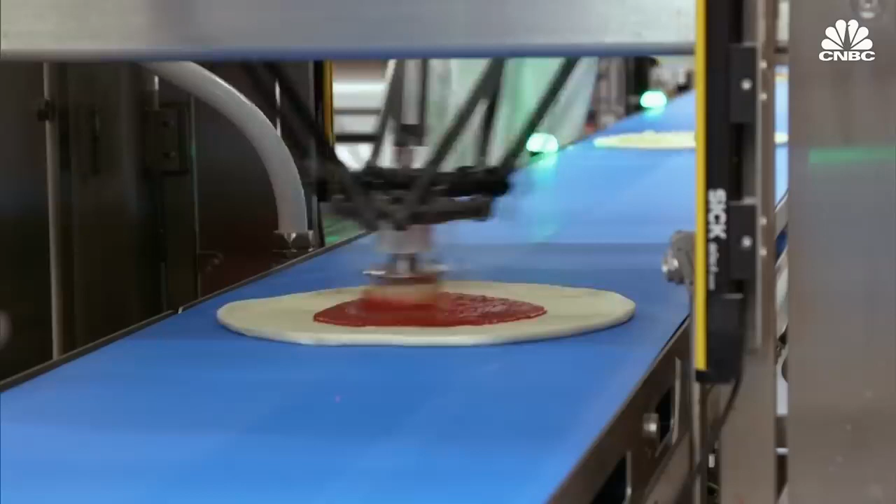What if there was a better way to make and deliver pizza to you? Turns out there is. Fast food jobs are demanding and sometimes even dangerous, but not for robots.

The machines can look at more things faster in greater detail. They never get bored. They don't need breaks.

Boston Dynamics has made a name for itself by building robots like Spot. We're using technology to advance the state of the art in molded fiber production, and we can do it with speed that is absolutely category leading.

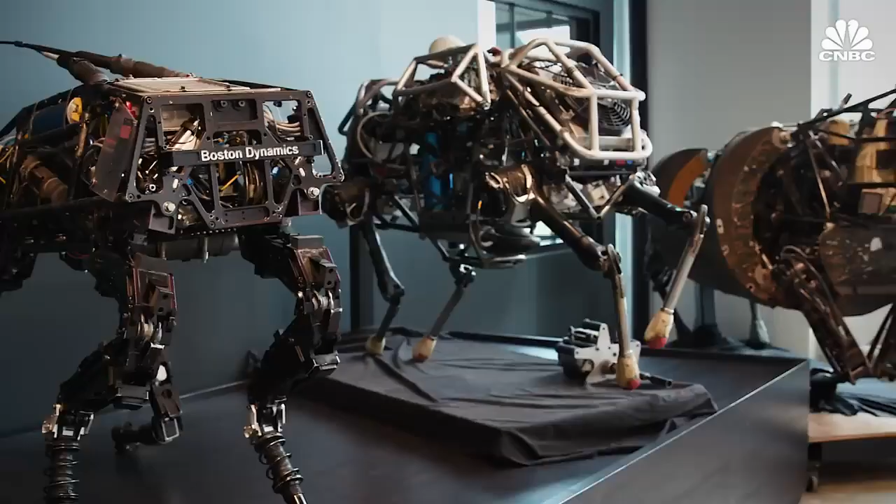Welcome to White Castle. This is Brittany. How may I help you?

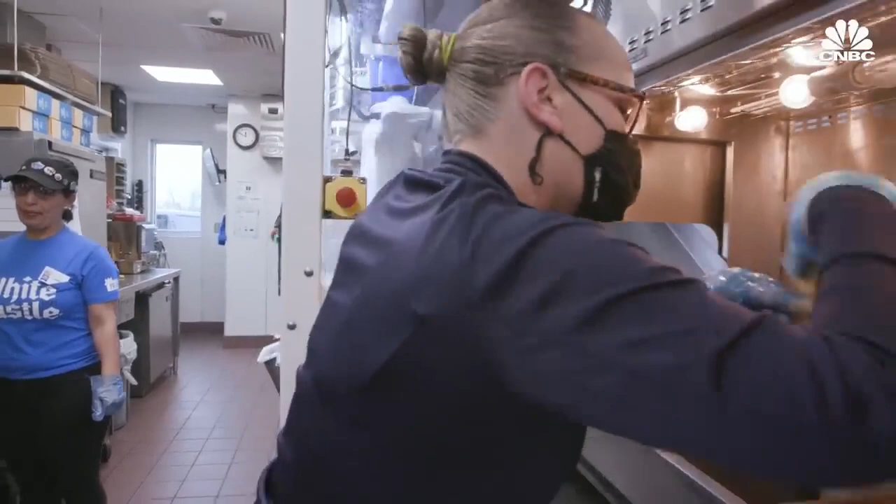This robot named Flippy runs the fry station at a White Castle outside of Chicago. With its mechanical arm and using computer vision technology, Flippy can cook everything from French fries and onion rings to cheese sticks. White Castle said it plans to add 100 Flippies to its kitchens nationwide.

We used to need 2 people to operate that French fry area during peak hours, and now we are able to only have 1 person operating that area.

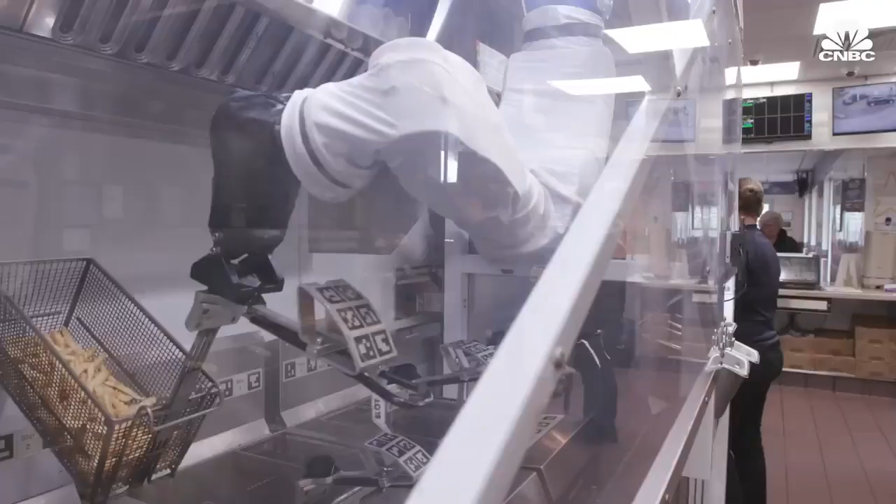Would you like to try the mac and cheese bites today? All right, thank you. If the screen's correct, it is 8.27.

Second window, please. Fast food jobs are demanding, quick moving, and sometimes even dangerous. But not for robots. When you look at the restaurant industry, it's a little bit late to the party in adopting automation and robotics in particular.

So far, the restaurants that are using them or trying them out say that this automation really only has to do with helping relieve boring tasks from workers' plates, help make their jobs easier, let them engage with the customers more. But there's a lot of reports out there kind of guesstimating how many jobs could be replaced by these robots, by automation.

Up to 82% of restaurant positions could to some extent be replaced by robots. Automation could save U.S. fast food restaurants over $12 billion in annual wages.

And restaurants are also struggling to find workers. American restaurants are down more than 560,000 jobs, or about 4.6% of its workforce from their pre-pandemic levels. About a third of Americans worked in a restaurant as their first job, and half have some restaurant work experience.

Yeah, the economics of this are very, very compelling. If you take minimum wage, just around the $20,000 per year mark, that's the cost of 1 robot.

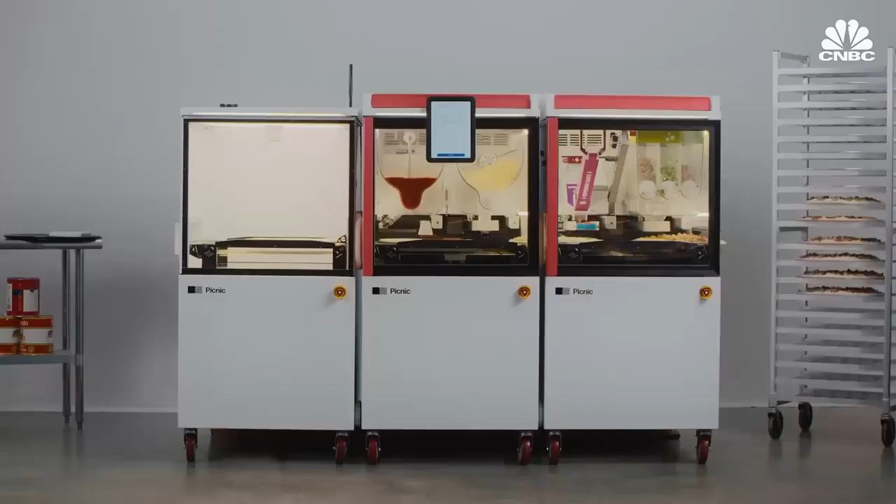Other companies in the space include Picnic, that has a robot that makes pizza, and Autec, whose machines make sushi. So what impact will robots have on the fast food industry and the livelihood of its workers? CNBC got a behind-the-scenes look at restaurant robot maker Miso Robotics to find out.

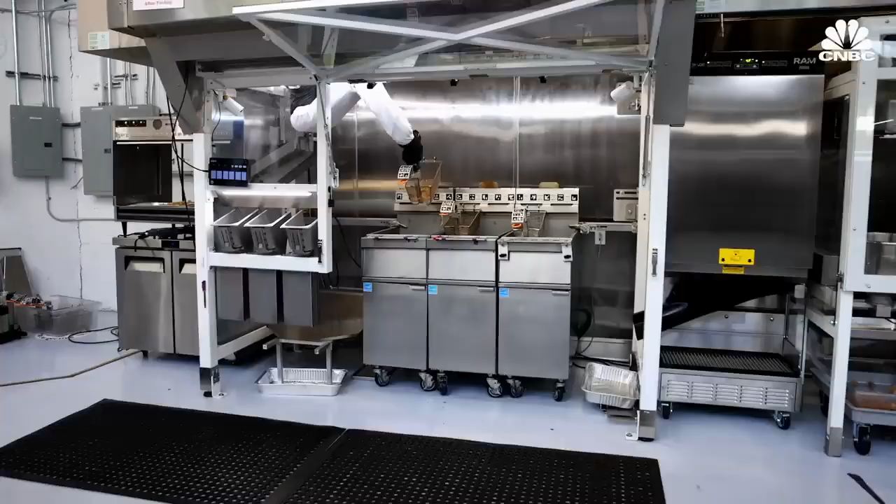Miso Robotics got its start in 2016 with a handful of engineers in a Pasadena, California garage. 2 years later, the company launched Flippy at a nearby Caliburger restaurant.

Flippy's first job was turning over a hamburger patty after it was placed on a grill by a human chef. But the company quickly pivoted to fried foods, rolling out a portable fryer station for baseball games at Dodger Stadium.

This was really the peak throughput test for us. Can Flippy keep up with in-between innings at a Dodger game and everybody goes to the concession stand? Can we meet that demand?

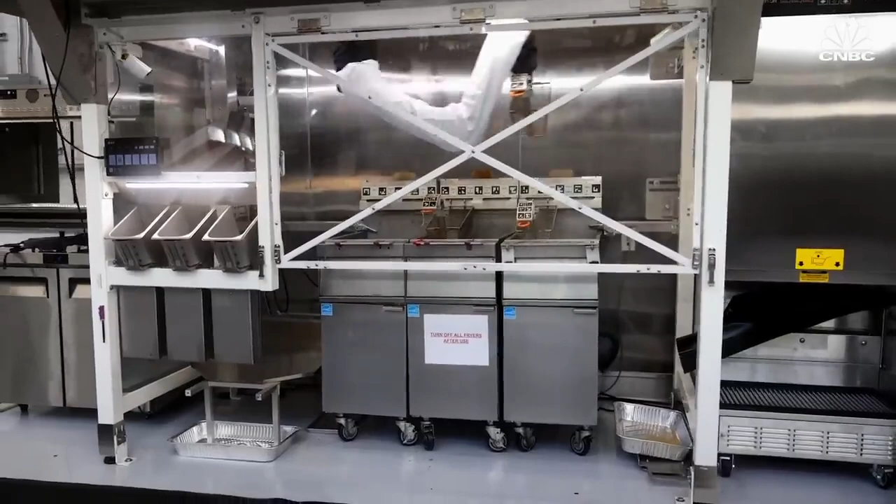In 2021, Miso launched Flippy 2 using a mounted rail system, AI, and computer vision technology that can identify and track food as it moves through the structure.

Although it has a camera, tablet, and robotic arm, engineers say the real tech is in the software. The hard thing to get right about this product is having the computer vision, the algorithms that plan the cook cycle, and the software that manages the robotic motion all work together so that it's as reliable as a refrigerator and it does the job.

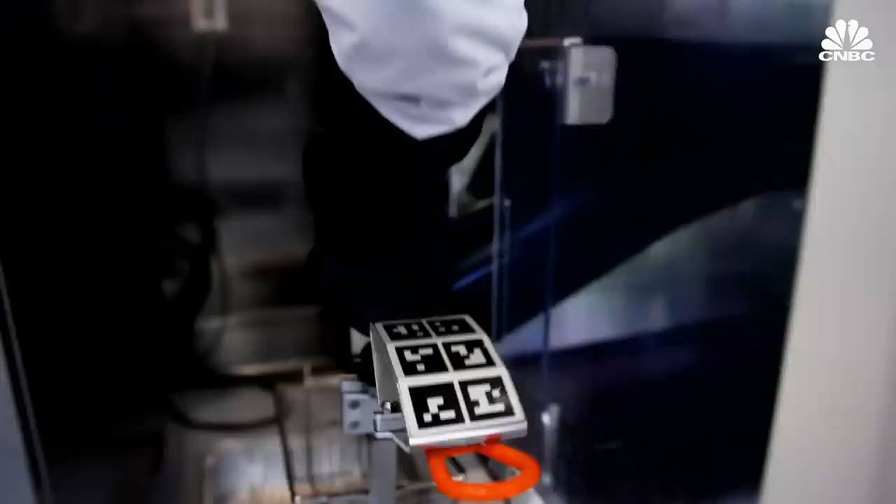Food is dispensed directly from the freezer into a basket. The robot's computer vision identifies the type of food and places it in the appropriate fryer. Once the food is cooked, the basket is taken out of the fryer, shaken, and dumped into a holding area where it is bagged by a worker.

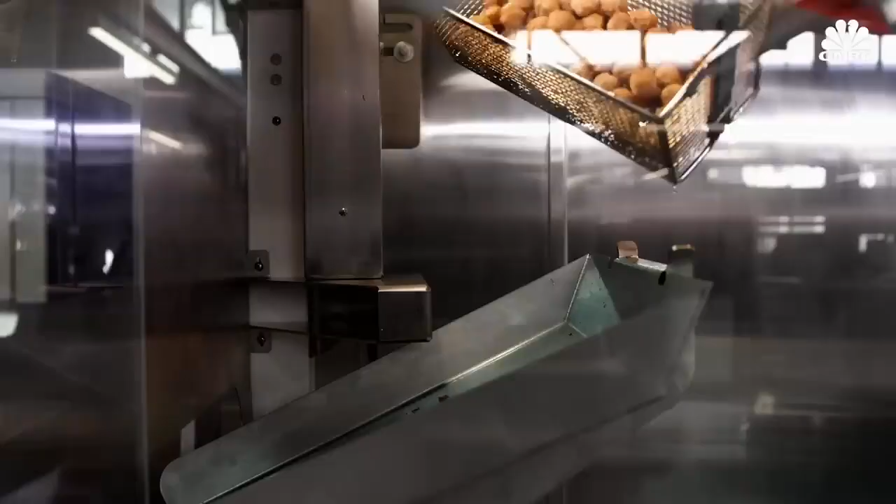For those of us who have been in a restaurant, this is exactly the same process that is done today by a human. He's constantly playing like a multi-frame game of chess in his mind, understanding where to be next, so his sequence of movements is precise and he doesn't undercook or overcook food. But what about the cost?

Miso charges restaurants about $3,500 a month for a Flippy 2 under its robot-as-a-service model. The company charges an additional fee of about $10,000 for installation.

By comparison, the median hourly wage of fast food workers in the U.S. is just $12.07 an hour. There were roughly 11.7 million restaurant workers in the U.S. in 2022. But Flippy 2 is different.

Flippy 2 works around the clock. We have many 24-hour locations where Flippy 2 is installed. Flippy doesn't call in sick.

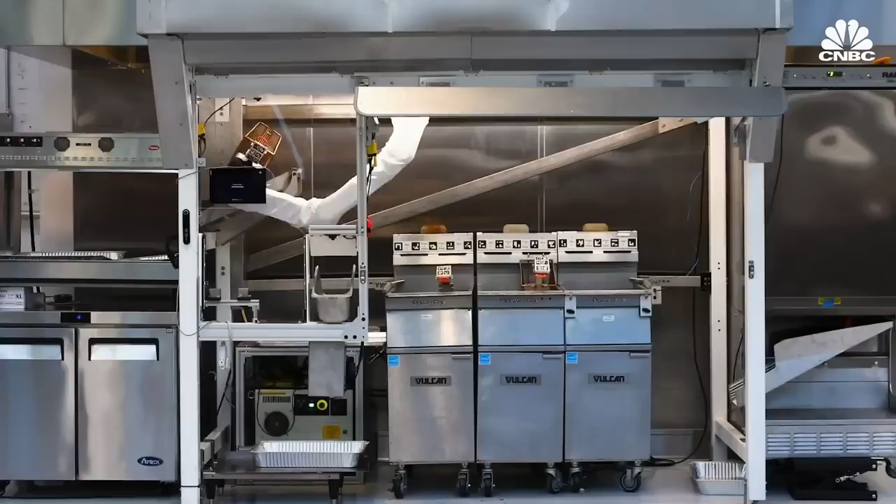Built in Columbus, Ohio, it takes Miso about 6 weeks to manufacture one Flippy 2. The current off-the-rack mechanical arm is the same type designed for car factories, and Miso says they cost $15,000 each, plus another $5,000 to modify with additional grippers and sensors.

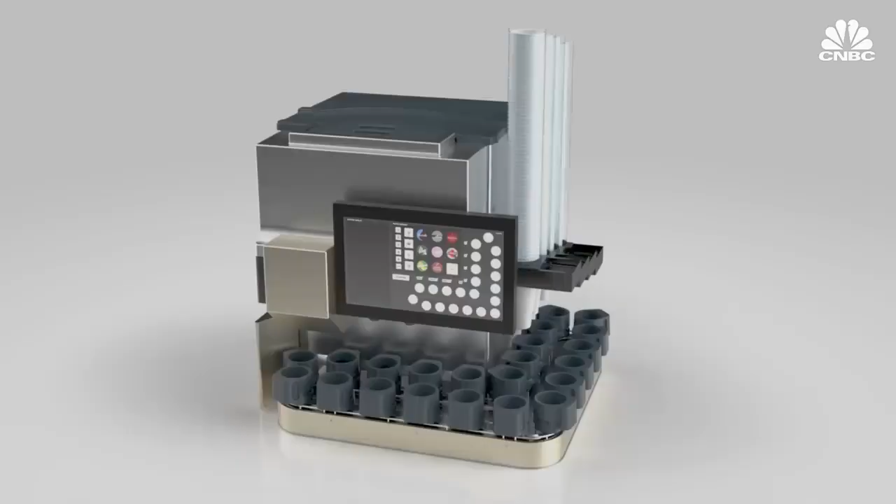Last year, Miso partnered with robotic arm maker Ally Robotics and hopes to start producing its own arm in 2023. The company also makes a streamlined version of Flippy 2 called Flippy Lite, as well as a drinks dispenser named Sippy. Flippy Lite is currently being tested in restaurants by Chipotle.

What Flippy Lite is designed to do is to take one item that requires frying and just cook the heck out of it all day long.

With about 25,000 shareholders, Miso has so far raised more than $70 million in crowdfunding. The company's also announced it is testing a robot that fries chicken wings for WingZone.

The global fast food industry is a $273 billion business, including more than 280,000 fast food restaurants in the U.S. alone. At this White Castle on the outskirts of Chicago, staff in the busy lunch hour shift face a barrage of orders coming from drive-through customers as well as the main counter.

Would you like to try any mac and cheese bites today?

Second window, please. It's very fast-paced. We're all in our positions, but we do move around, jump about to help out, to get the orders out.

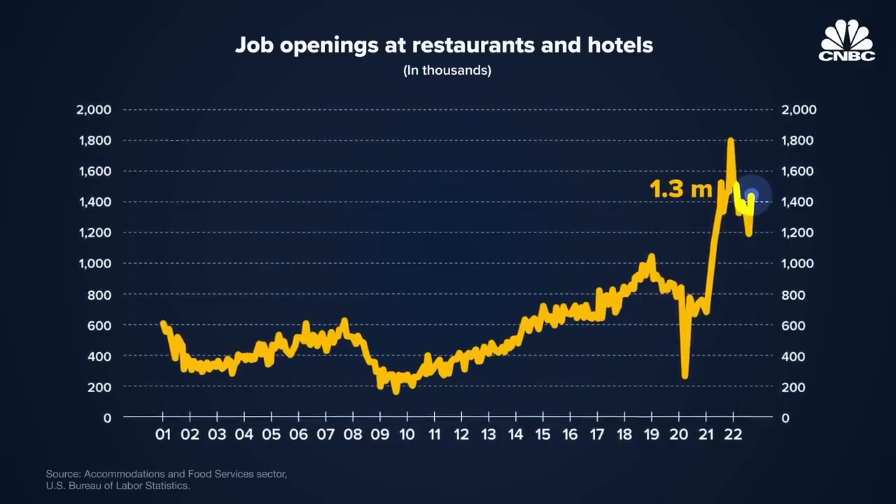But meager salaries, fewer teenagers in the workforce, and fear of COVID have been a drain on fast food restaurants. Job openings at restaurants and hotels reached 1.3 million in November 2022, the 20th consecutive month with over 1 million vacancies. Bars and restaurants make up about 90% of those positions.

A typical fast food worker makes about $26,000 a year, compared with a concierge at a hotel who can earn more than $37,000. During the pandemic, we faced a lot of staffing challenges, and things are better, but there are still challenges with staff in many locations.

To assist workers, White Castle added Flippy to take over its fry station. The robot cooks food more consistently and doesn't require time off.

Some restaurants are also looking at this as a way of saying, well, this robot is expensive, but is it cheaper than however many employees I would need to hire, especially because a lot of workers have not been sticking around as long as they're used to.

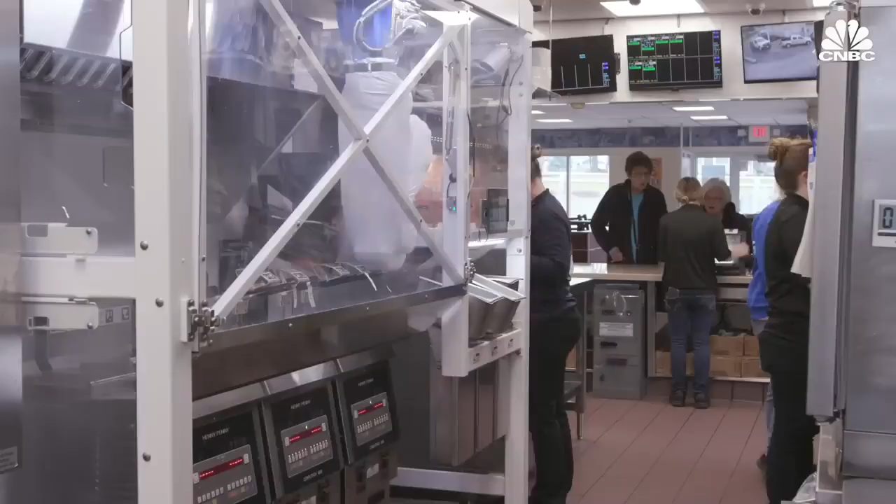This is one of the positions that is the hardest to fill and hardest to retain for restaurant operators. There are dozens of positions back of house. This one is a really demanding one. It's hot and it's very, very fast paced.

Robots like Flippy solve other problems for restaurants too. For starters, fast food work can be dangerous. In California, the state with the highest number of people employed in the fast food industry, workers face health hazards ranging from overflowing sewage, smoke inhalation, and extreme heat, according to one study.

Turnover is another headache for the industry. Prior to the pandemic, the restaurant industry faced a workforce turnover of 130%, according to Panera Bread's CFO, Michael Bufano. At the same time, low-wage workers made up 43% of the U.S. workforce.

As you look at the labor allocation within the restaurant, that's being able to shift one human from that station somewhere else, and that's saving every single month probably somewhere around $700 to $900 in actual profit.

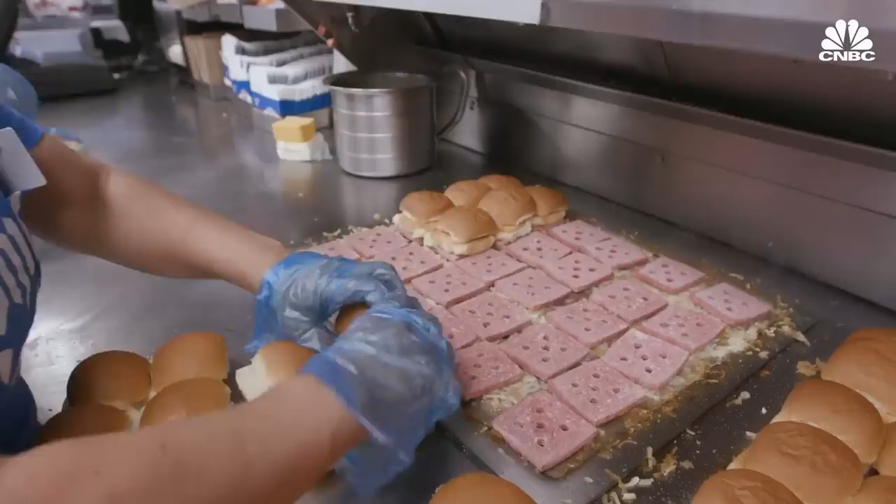Another incentive for restaurants, hard-to-fill positions have forced chains to push hourly wages to new highs. The wages have been very low in these industries. They've really been very much pegged to the minimum wage, so that when the minimum wage has been allowed to decline in real terms, that is, it hasn't kept up with inflation, then those jobs get progressively less and less attractive.

Labor is one of the biggest costs restaurants face, averaging about 25 to 30% of sales. McDonald's said it would reach an average of $15 an hour by 2024 at all company-owned restaurants. Starbucks said it was bringing its pay floor for U.S. baristas to $15 an hour.

Gen Z consumers made 5 billion restaurant visits in the year ending July 2022, including 4.3 billion trips to fast food eateries.

Restaurants often have thin margins, which is one of the reasons why adoption of automation has been slow. But that could be changing as the cost of robots has declined by 50% over the last three decades.

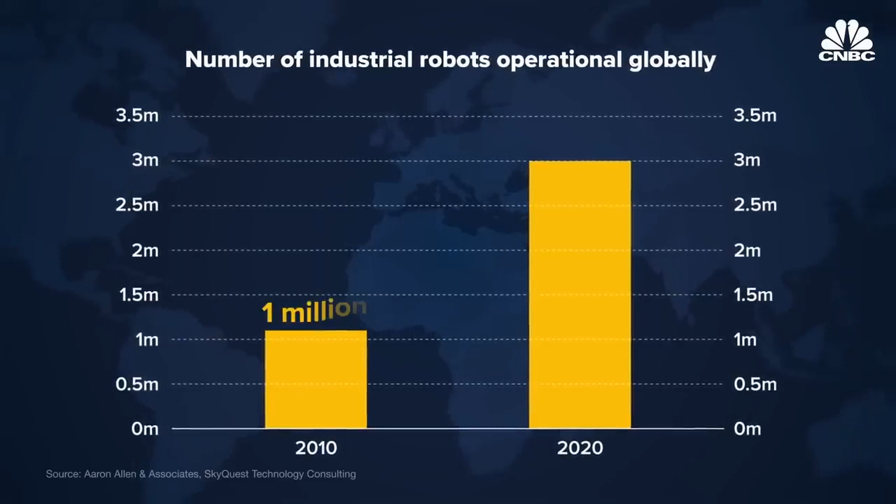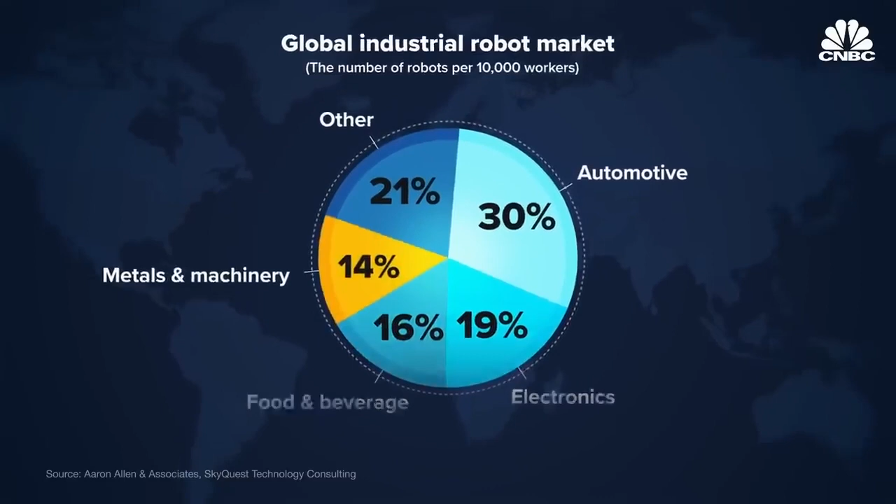Industrial robot usage has tripled over the past decade, from about 1 million in 2010 to 3 million in 2020. The auto industry, by far the largest segment in the market, is followed by electronics, food and beverage, metals, and machinery. The industrial robotics market is expected to reach $81 billion by 2028, up from almost $42 billion in 2021.

But will those trends impact Miso's business? Robots are hard and expensive to develop. It takes a lot of time and money, and frankly a lot of engineers, to get all the technology working together smoothly. Miso makes money by having more and more robots in the field.

In 2021, Miso spent $1.5 million on R&D, $7.8 million on salaries, $6 million on sales and marketing, and a little over $6 million on overhead and administrative expenses. Revenue was just $36,000 in 2021, mostly from the deployment of one Flippy.

Right now, it seems like Miso Robotics is probably the biggest and best known player in the space. Competitors are a pretty small pool at the moment. We've been on the forefront of this for a long time, but they are coming, and we know the ones that aren't here today will be here tomorrow.

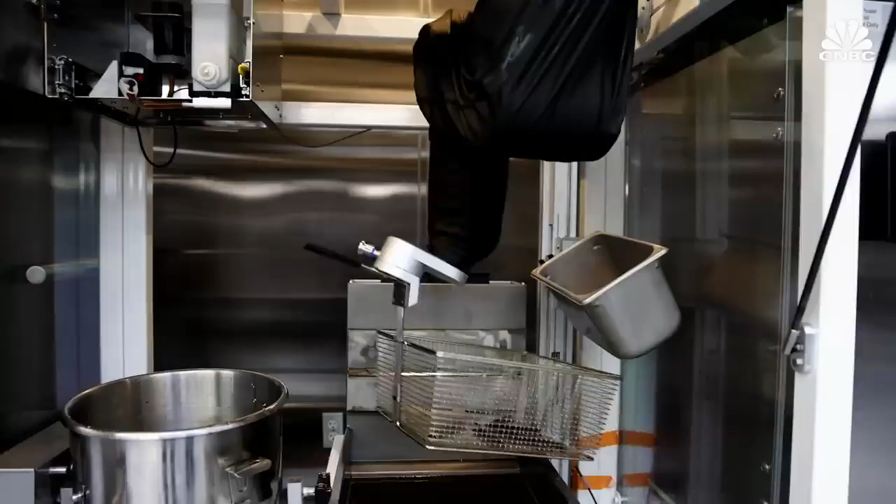Robot adoption could come quickly, in a similar fashion to the way delivery apps revolutionized the restaurant space. The global food delivery app business is over $150 billion, triple the amount it was in 2017.

And that would be welcome news for fast food restaurants who face pressures ranging from rising food costs to staff turnover. Americans spent $2.1 trillion on food in 2021, with more than half of that money going to food away from home purchases. The tide has turned.

There's no longer a question of whether robotics are coming to the industry. It's a foregone conclusion. The question is at what pace and in what form. And what you will see in the months and years ahead, for the foreseeable future, is more and more automation solutions like Flippy 2 being deployed in everyday restaurants, including some of the best known brands in the world.

There was a lot of hype in 2017 around Zume. What if there was a better way to make and deliver pizza to you? Turns out there is. Zume is revolutionizing the delivery model. All pizzerias out there, you're in trouble.

At the time, Zume was a pizza company that used robots to automate the pizza creation process and utilized large oven-carrying trucks to bake the pies as they traveled to customers. The idea was a hit and earned Zume a $375 million investment from SoftBank.

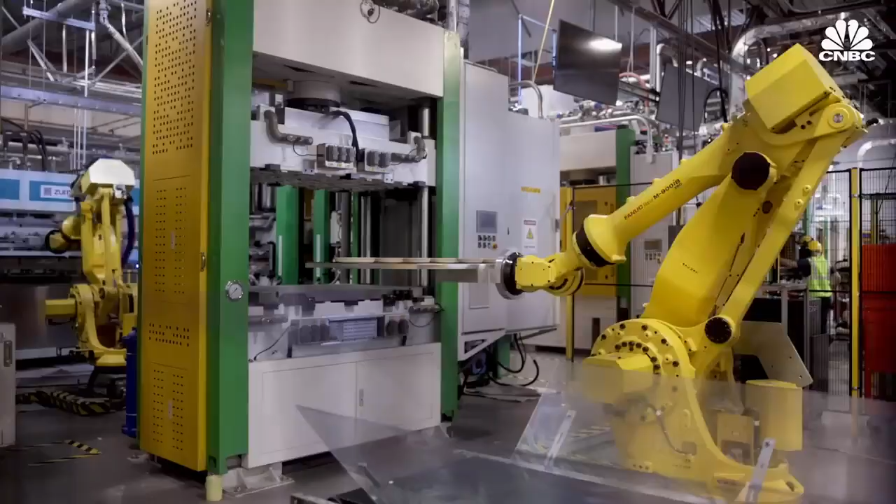Now, Zume is dedicated to producing compostable packaging that is durable and backyard compostable, breaking down in a matter of 90 days. Zume is breaking into the $274.2 billion sustainable packaging market, which is expected to grow to $413.8 billion by 2027. But the industry does face challenges.

I wish I could say it was just the cost, and cost is going to come down, or that we just need one thing, but it's really, I think, a variety of factors. As the oceans fill up with plastic waste and as companies make pledges to switch to greener packaging, it could be great timing for Zume.

So let's take a look at some roadblocks in the compostable packaging industry and what can be done to overcome them.

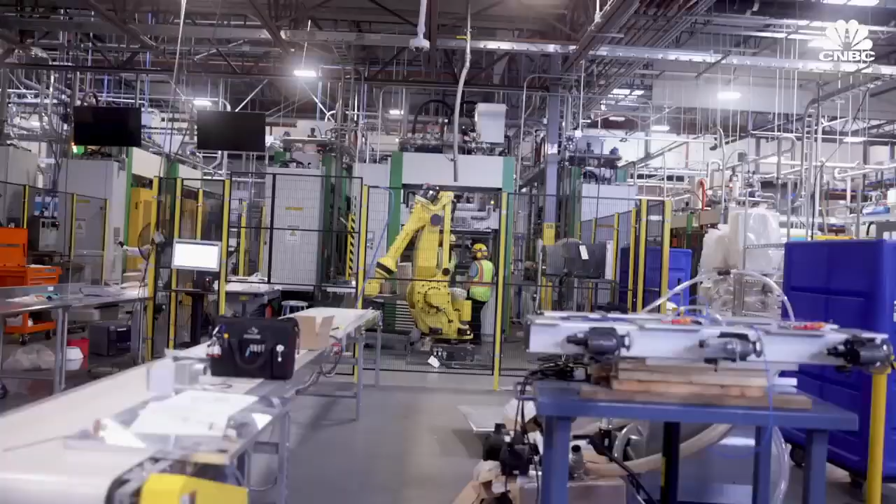Let's talk about the life cycle of a package first, using a takeout container as an example. Takeout containers can be made of many different materials, which all have their pros and cons, like plastic, metal, styrofoam, cardboard, and a compostable material like molded fiber.

Some plastics and metals can be recycled, but they have to be perfectly clean in order to be made into another product. They can also be downcycled, which is where they're used to create something that cannot be recycled again, like a park bench. But recycling has failed in the US.

In 2018, less than 9% of plastic waste was properly recycled in the US, and it got worse in 2019 when China stopped importing American trash. So most of what you think may be getting recycled is actually getting sent to landfills, or making its way into rivers and oceans. The UN says that by 2050, we'll have more plastic than fish in the ocean.

Plastics become so prevalent that every person on the planet eats a credit card's worth of plastic a week. Plastic recycling has actually been considered by some to be a ploy by oil companies to make plastic production seem more environmentally friendly than it is.

And even sending food scraps to the dump can be harmful. When you're actually introducing those organics in landfill, you create a lot of methane. And as you know, methane is a very important greenhouse gas emission. So then you want to reduce that amount of organics that you send to the landfill.

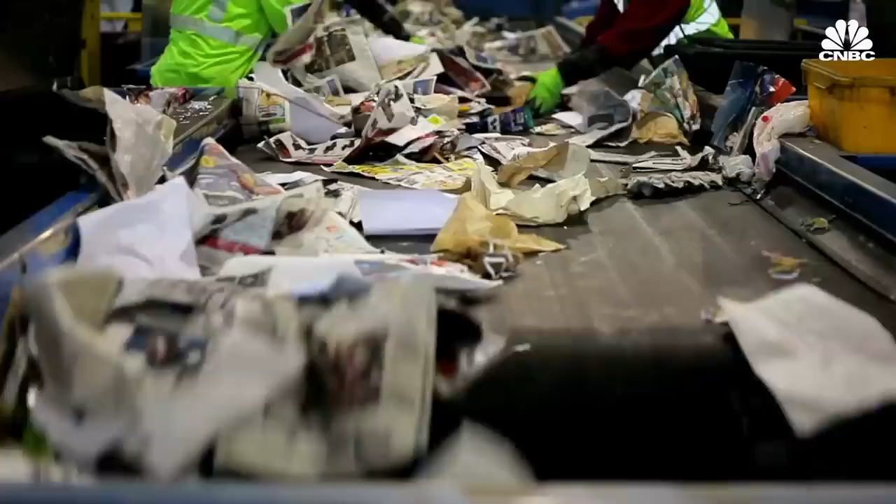Aluminum containers are a bit easier to recycle, but still only saw about a 35% recycle rate in 2018. Cardboard is recyclable and compostable, but only if it's clean and doesn't have some sort of coating on it. Virgin cardboard can also contribute to the deforestation of endangered habitats.

Styrofoam, or polystyrene, is technically recyclable, but not in a way that is economically feasible or environmentally effective. Many cities and states, including New York City, Maine, Vermont, Maryland, and a long list of cities in California, have completely banned the use of polystyrene, and the trend is growing.

Compostable materials seem like a solution to these recycling issues, but come with their own set of confusing marketing tactics and end-of-life difficulties. For instance, the word biodegradable, which is used to describe certain materials like plastic made from corn, has been scrutinized. A bio acronym at the beginning doesn't necessarily mean that the polymer is from bio-based resources or is biodegradable.

And if it's biodegradable, it doesn't mean that it's compostable either. The word biodegradable on its own, as a marketing term, is seen as potentially pretty misleading. So several states have passed laws forbidding the term biodegradable in marketing language when it comes to single-use items, including California, Maryland, Washington, and Minnesota for bags specifically.

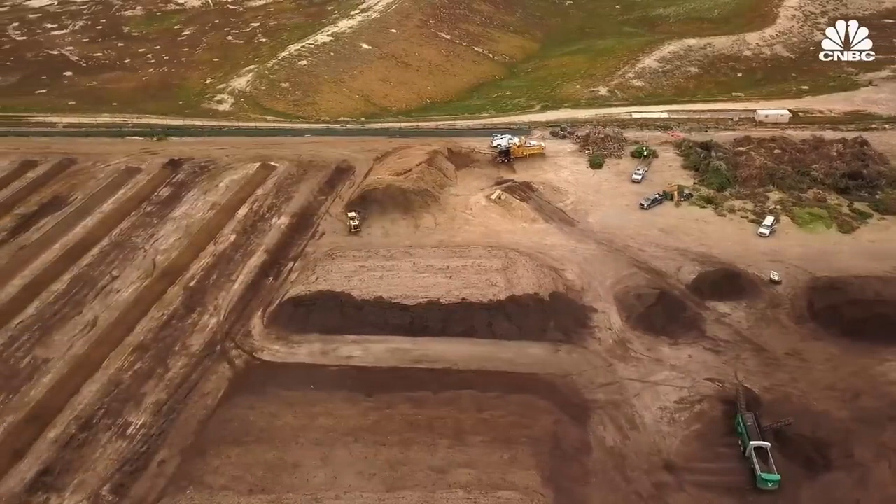Some materials require composting in an industrial facility, like certain cutlery and coffee cup lids, which means you can't just throw it in your backyard and hope it will break down. It has to be sent to a facility that monitors the chemical and temperature levels of a large compost pile. The materials are also sifted to make sure everything has broken down properly.

And if you think you're doing the environment a favor buying these industrial facility compostable products and still throwing them away in the trash, you're only partly correct. Landfills are usually too compressed to allow oxygen and microorganisms to break materials down, even for things like food or paper, which are usually pretty easy to break down.

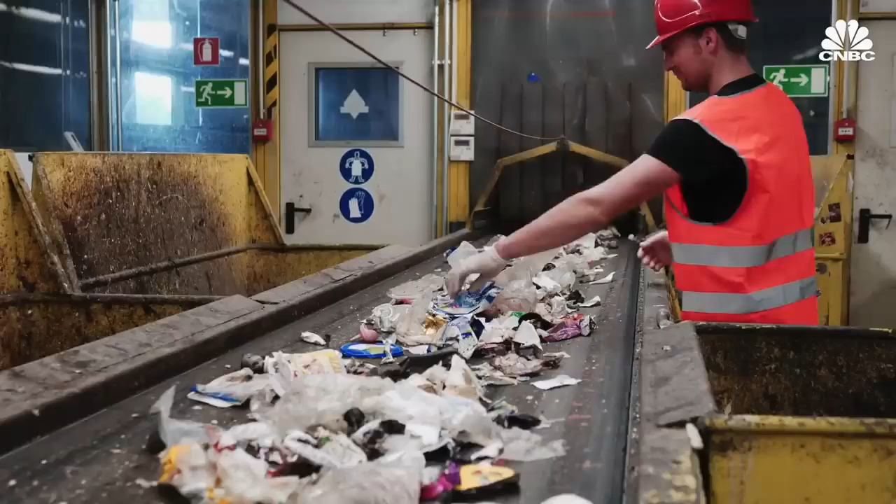Unlike with recycling, where you have different plastic types and different shapes that can help determine recyclability, and each community has its different requirements based on what their recycling facility can sort, there's no one common definition of what is recyclable. With compostability, it's different. We have international standards saying this is what is compostable, regardless of what plastic type you're using, regardless of whether there's paper in there or not.

According to one report, only about 27% of the United States population has access to some kind of composting program that accepts either food waste only or food waste and some form of compostable packaging. So it's not a ubiquitous solution yet.

The real difficulty here at Zume is finding the solutions to replace all of those arrows, so you don't have the confusion at the consumer level, can I or can't I, and throw your hands up and just throw it in the trash and let it go to the landfill. So it's going to make it simpler and easier. I know I can just take it, compost it, and 90 days later use it to fertilize my garden. Zume developed packaging that is backyard compostable, and it really makes a difference.

Backyard compostable packaging can break down without the use of industrial monitoring. They use microorganisms in the soil or water to break down packaging. For people living in areas without composting services, this gives consumers the option to discard their waste in a local compost pile or even in their backyard compost piles.

I can tell you that we've tested our products with independent labs in all of the known waste streams, and we have all the certifications that give you the results that you'd be looking for.

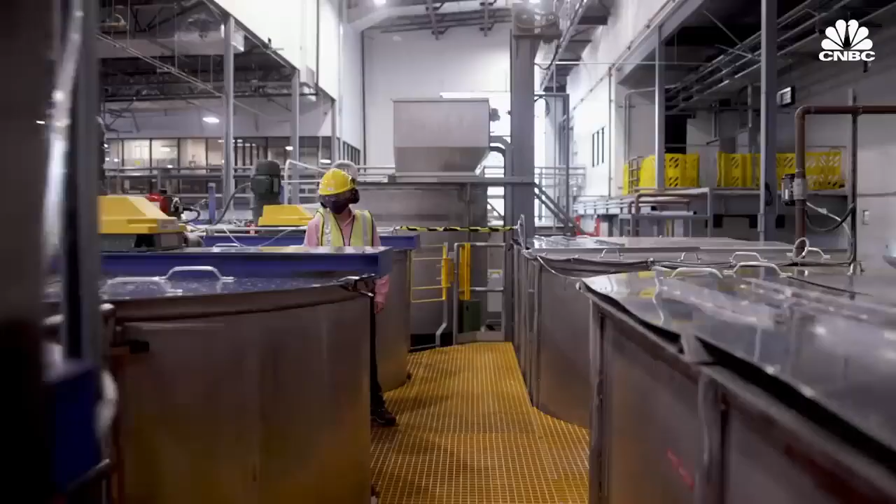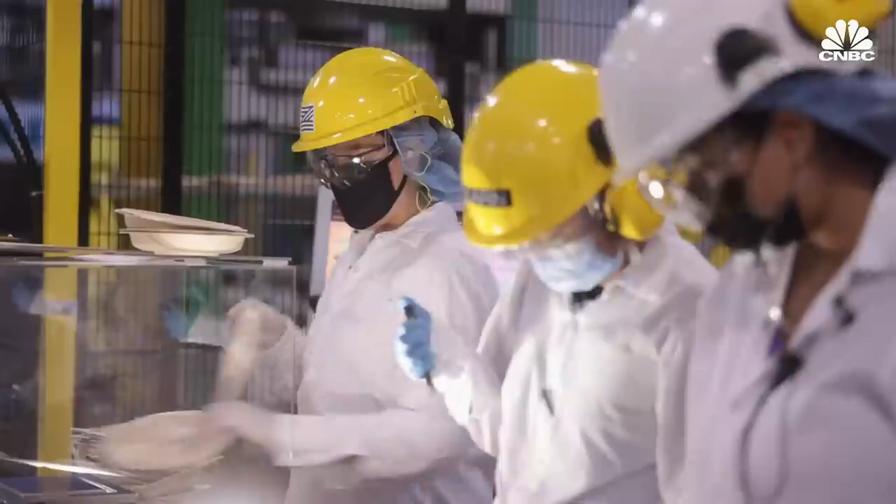One of the big things I think we can do here is revamping the supply chain. Let's build a pulp mill next to the source of the agricultural waste, so it doesn't get burned or taken to a landfill. Turn it into premium molded fiber packaging that then is composted, so it's a place to grow the next crop. It's a closed loop supply chain, and that's something I think we've heard a lot about over the past year, the supply chain.

The company has products available in 21 countries, including takeout containers, cosmetics packaging, and their robotic technology, for when a company wants to produce packaging themselves.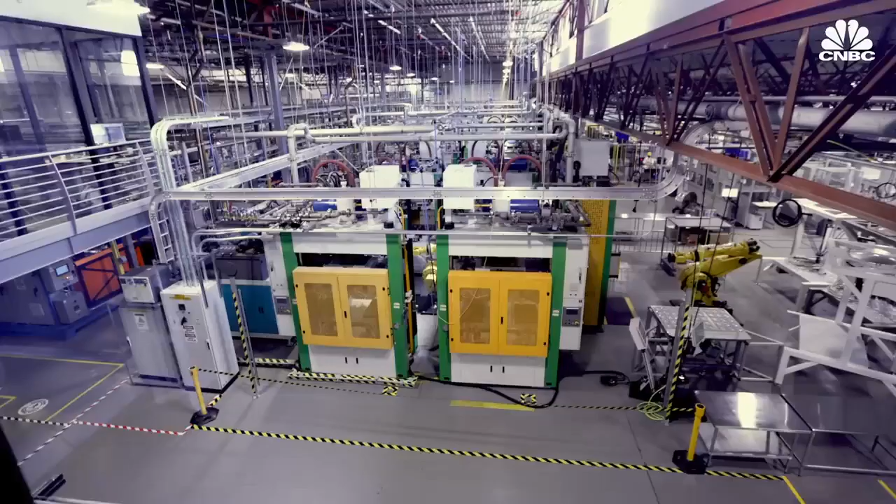We work with some of the largest industrial companies in the world, and they build factories based on our technology. At the same time, we work with some of the biggest brands in the world, and we solve their product problems. We help give them a path beyond plastic. When we have these fully qualified products and these fully qualified factories, we connect the two of them together, and we give brands a path beyond plastic at scale with great economics for the brands and great economics for the factory partners.

The sustainable packaging industry is a $274.2 billion a year business. Of course, the packaging industry as a whole is about $900 billion, so there's still a lot of work to be done.

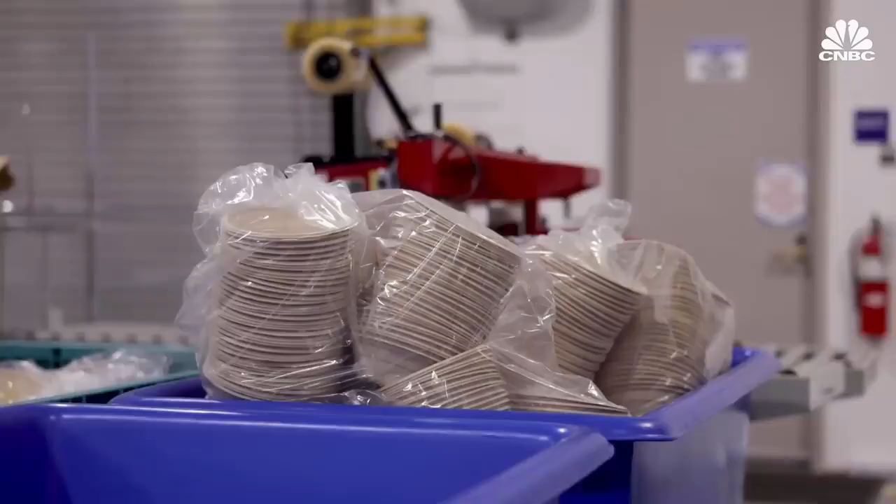There are some constraints when it comes to compostable packaging, like higher cost. 100 plastic straws can cost as low as $1.53 when bought in bulk, compared to paper straws, which can cost $1.67 for 100 when bought in bulk. That's an increase of 9%. These plastic clamshell containers for burgers and sandwiches can cost 13 cents each when purchased in bulk. Their natural fiber counterpart can cost 19 cents each when bought in bulk, an increase of 46%.

Remember, packaging is a commodity and it's always a low-cost product. So in general, for food or for this kind of situation, your margin is very small, you don't have a large amount of room there to have a cost in the packaging system.

Zume says its robots are the reason it can keep costs down. Previously, machines could either make very low-quality things quickly.

Some machines could make high-quality things very slowly, but they were so expensive that they would be outrageous for a consumer market. What our technology does that's so revolutionary is it can make very high-quality parts very fast. And then there's the question of performance.

Compostable packaging companies have come up with many ways to make their products as durable as environmentally damaging alternatives, but it's not always easy. We're using technology to advance the state of the art in molded fiber production, so we can take many millions of tons of agricultural waste and turn it into not plastic. And we can do that without compromising on performance or on price, and we can do it with speed that is absolutely category leading.

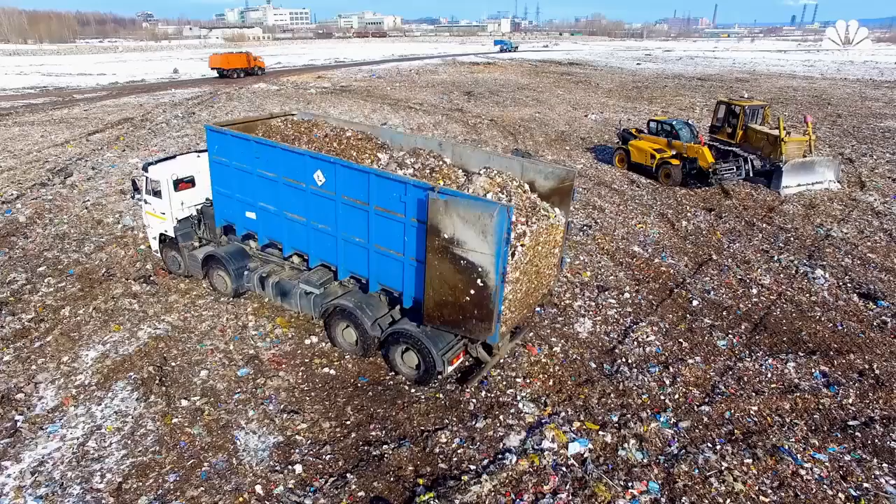One thing Zume doesn't have control over, though, is the difficulty that comes with waste management, including the lack of composting programs mentioned before, along with the general confusion of whether something is compostable or not.

The problem is that the waste management system is still at the state level, so we have 50 states with different types of goals. We should have tried to get at least an aggregation of states, or if the federal government can actually pass some type of legislation where we have goals to move the whole country forward.

Without a fully circular economy, meaning packaging is created, used, and turned back into materials that can be used to create more, our packaging obsession will continue to cause problems. There's tremendous demand for these solutions in the market and with consumers, so now that the solutions exist and the demand is there, now we're getting the scale.

You may have been one of the 140 million people who've seen this video on YouTube. Boston Dynamics has made a name for itself by building robots like Spot, which move in ways that many of us have only seen in sci-fi movies.

We look at ourselves as having mastered the ability to create robots with mobility, vision, and manipulation, and we think we can combine those in almost an infinite number of ways at different applications.

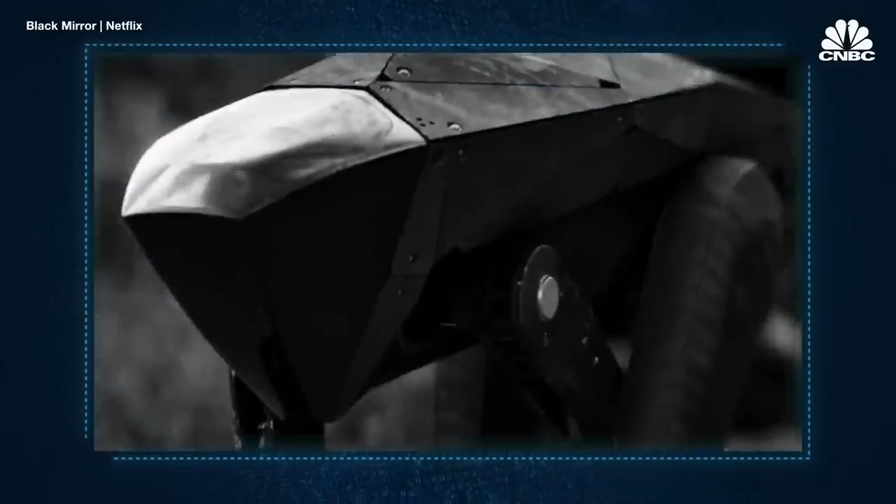The public's fascination with Boston Dynamics' robots is likely owed to equal parts awe and fear. A 2017 episode of the popular dystopian Netflix show Black Mirror depicted a woman running from a pack of killer robot dogs. The show's creator later admitted in an interview with Entertainment Weekly that Boston Dynamics' videos were the inspiration.

Most people think when they see Spot that that's cool. There is a small fraction of people who say it's creepy. We've been telling ourselves fictional stories about dystopian robots for 100 years. I think it's people's desire to explore that fear that makes them want to react so negatively to Spot.

But while Boston Dynamics has sparked the imaginations of the general public with its viral videos, the company is now hoping to get the attention of paying customers.

I expect that we will become a serial producer of novel robots with advanced capabilities. I think we'll build every 3 to 5 years. We're going to roll out a new robot targeting a new industry.

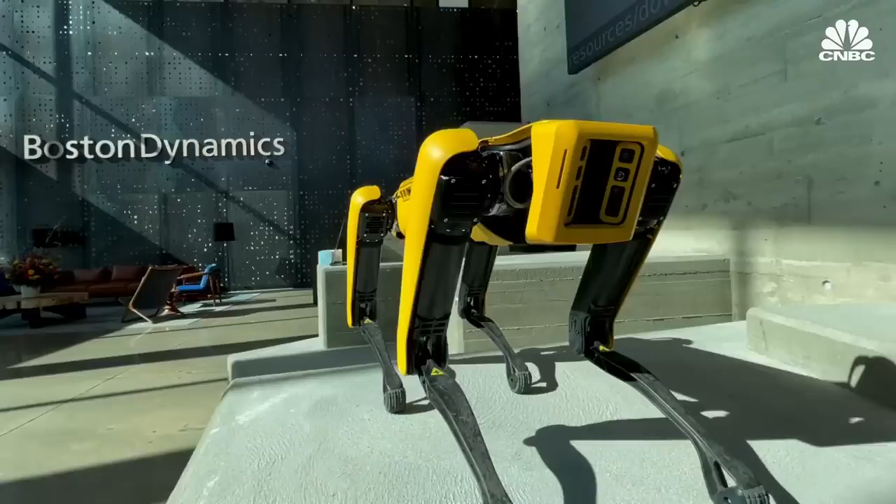CNBC got a rare look at Boston Dynamics' office in Massachusetts, where the team showed off two of the robots they're working to commercialize, Spot and Stretch. The yellow robot that you see walking around is a mobility platform. It gets really interesting when you start adding payloads on it and integrating it into things.

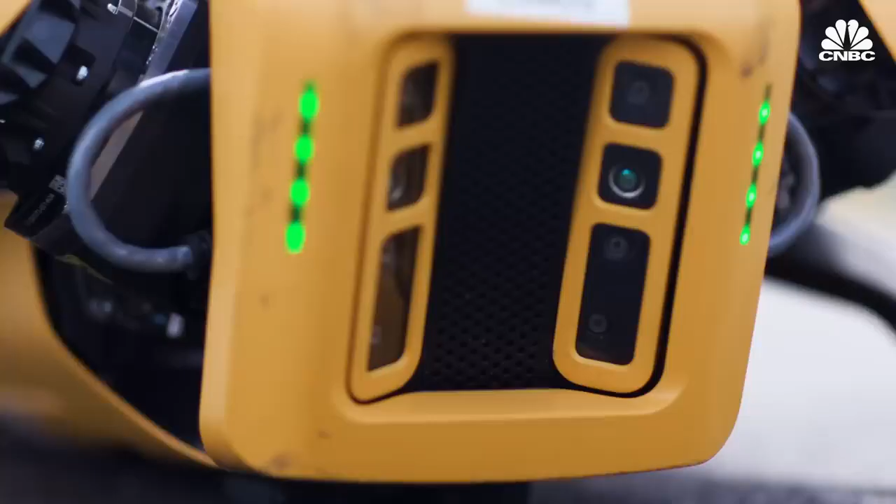We have really nice visual cameras, thermal cameras, microphones, and gas sensors, and those let you take the robot into interesting places and collect data about what's going on.

We see Stretch as ultimately a general purpose box-moving machine that can be used anywhere in the warehouse. Those two markets in particular, the robotics inspection and the warehouse market, are what we perceive to be the fastest growing markets within all the robotic subsegments.

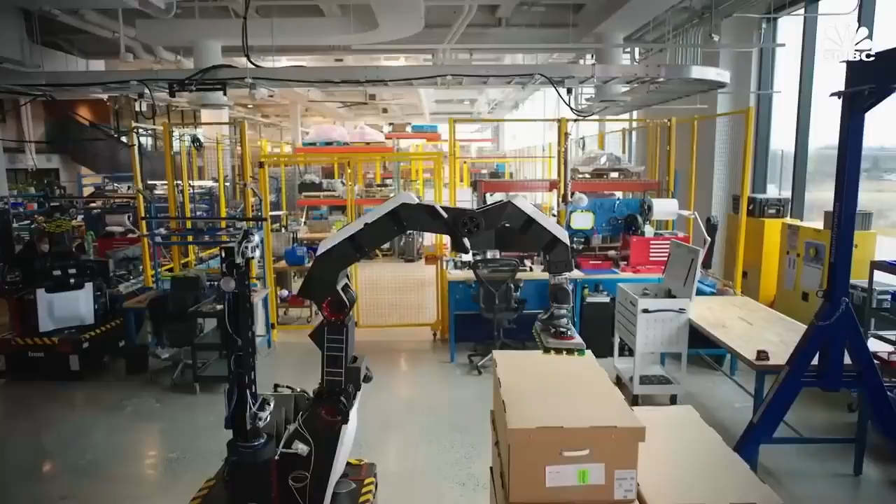The machines can look at more things faster in greater detail. They never get bored, they don't need breaks, they're just relentless. With nearly 30 years of experience, Boston Dynamics has proven its ability to make robots that move in remarkable ways. Now the question is, can the company turn a profit?

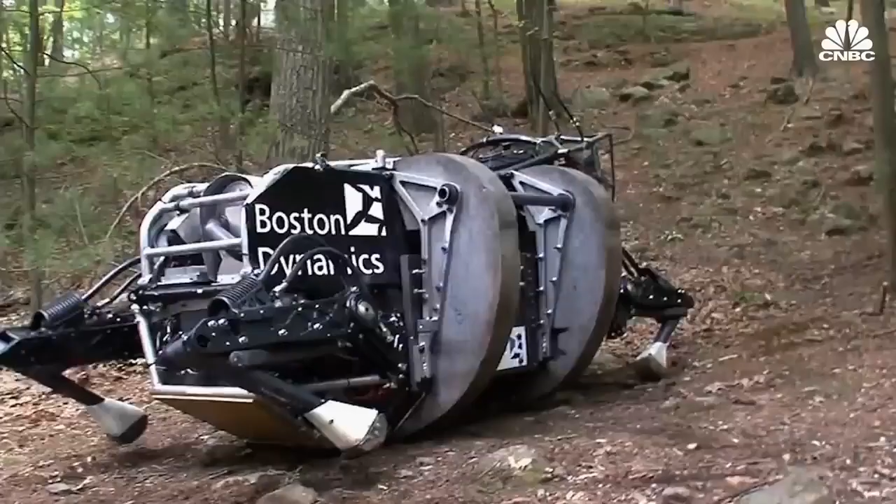Boston Dynamics was founded in 1992 by Mark Raibert. The company was an offshoot of Raibert's work on dynamic robots at Carnegie Mellon and MIT. Early on, much of Boston Dynamics' research and development was funded by the US military and DARPA. In addition to robots, Boston Dynamics also developed 3D computer simulation software.

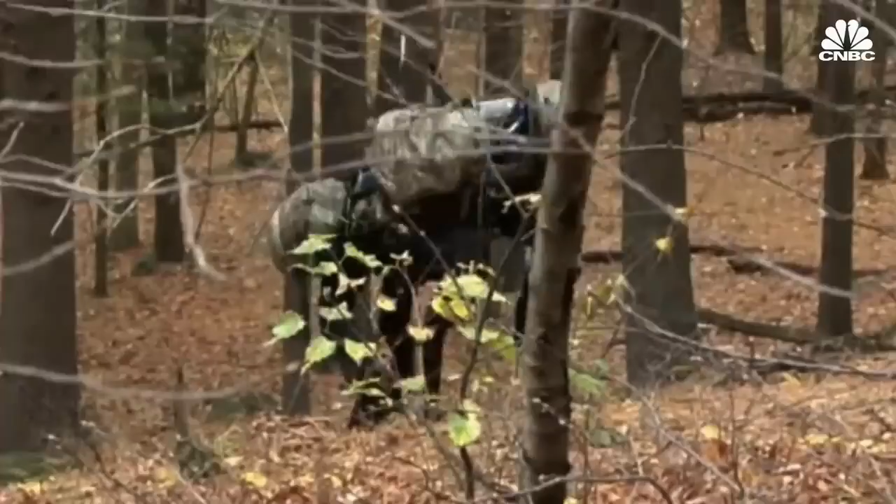This robot, LS3, was part of a project that we worked with DARPA and the Marines. This was a proof of concept project to show that the robot could actually carry equipment in a useful way for a Marine squad. Some of Boston Dynamics' other early creations included Big Dog, which, like LS3, was meant to traverse rough terrain and help soldiers carry gear, and Cheetah, which at its fastest could reach speeds of 28.3 miles per hour.

Petman was one of the company's first humanoid robots. It was developed for the US Army to test the special clothing used by soldiers for protection against chemical warfare agents.

We're very proud of our history that involved DARPA and government funding for creating some of the fundamental technology. It was really that visionary funding sustained over long periods of time that was required to solve truly hard problems. But in 2013, the company's focus shifted after Boston Dynamics was purchased by a well-known technology behemoth.

What does a Big Dog, Wildcat, and Cheetah have in common? While it may sound like the beginning of a joke, those are the names of robots by Boston Dynamics. Google continues its recent string of acquisitions with an engineering company whose repertoire includes designing research robots for the Pentagon.

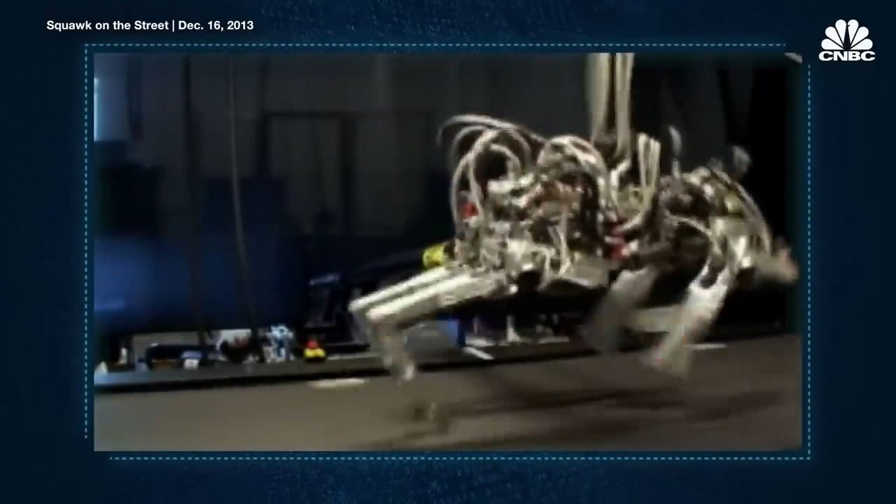When Google purchased Boston Dynamics for an undisclosed amount, the internet giant was gobbling up robotics companies left and right. The New York Times first reported the acquisition, noting that it is the 8th robotics company Google has bought in just the last 6 months.

There is speculation that Google wants to build a new class of robots that could perhaps do everything from warehouse work to package delivery. At that time, Google was a bit more ambitious, and they were trying to look for the sort of next big thing. And highly specialized robotics is sort of perceived as a big emerging area that the industry was expecting or anticipating at that time.

Google itself did not say much about the acquisition, other than that it would honor Boston Dynamics' existing military contracts, but was not interested in becoming a military contractor itself. I think there are some concerns around Google dabbling with military contracts. They might hurt their public reputation.

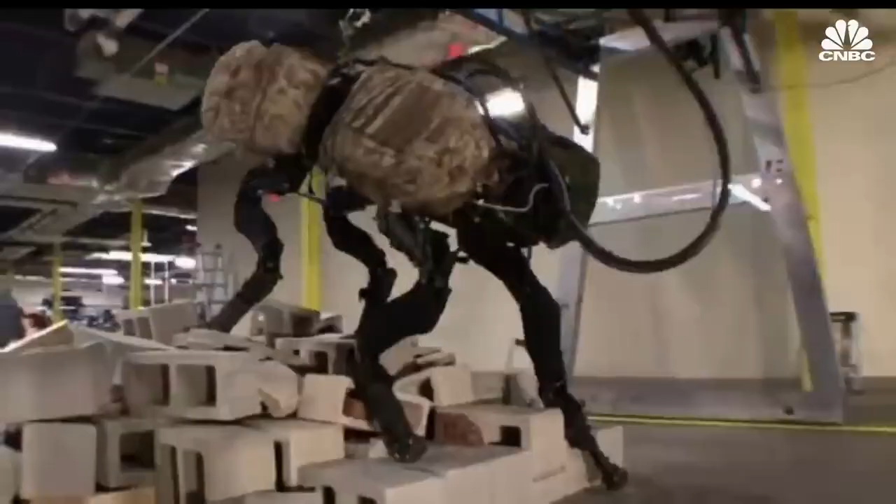But without government contracts, Boston Dynamics would lose its revenue stream. Even existing contracts that the company had with the military did not always pan out. And R&D was expensive. Owning Boston Dynamics reportedly cost Google $50 million a year.

Internal movement at the company also shook things up. When Google bought Boston Dynamics, its robotics effort was being run by Andy Rubin, who was well known at the company for leading the development of Android. But after Rubin left Google in 2014, Google's robotics division stalled.

Then in 2015, Google, which by then was renamed to Alphabet, got a new CFO, Ruth Porat. Over the next few years, Porat went on a cost-cutting spree, and Boston Dynamics was one of the casualties. That relationship didn't really last very long, mainly because the fruit of that relationship is not as big as what Google perceived it to be.

Boston Dynamics again found itself with a new owner. SoftBank, adding to its artificial intelligence portfolio, bought robot makers Boston Dynamics and Tokyo-based Shaft. Once that company moved on to SoftBank, it tried to inject more of a commercial DNA into the startup itself.

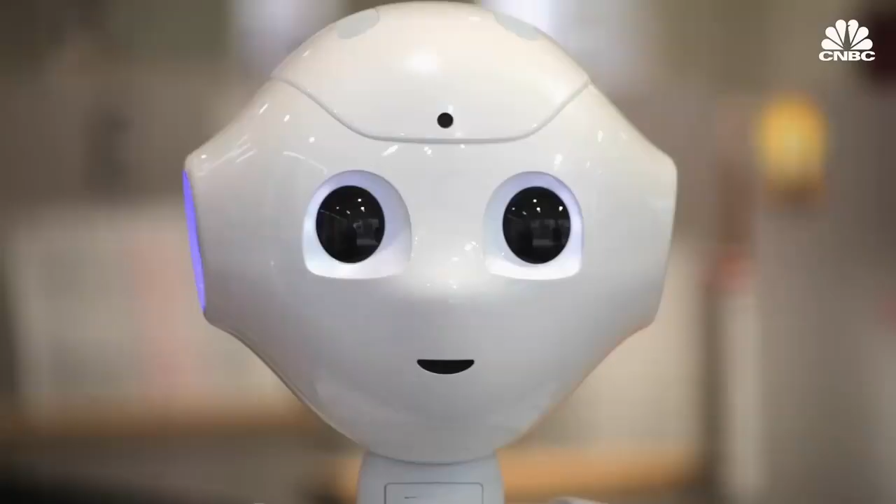When SoftBank purchased Boston Dynamics in 2017 for a reported $165 million, the Japanese conglomerate already had a few robotics companies in its portfolio, as well as a consumer robot known as Pepper. The idea for SoftBank was that it really wanted to become a large robotic supplier to the industry in general.

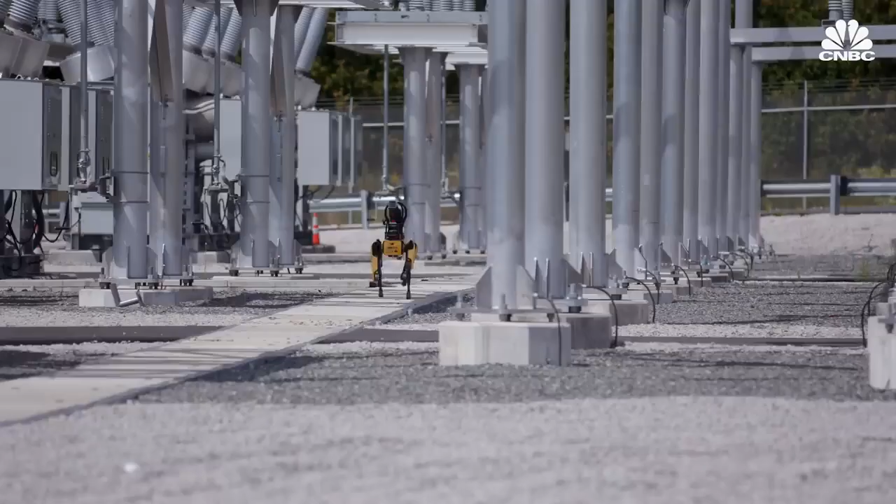Under SoftBank, Boston Dynamics did open up sales to its first commercial product, Spot, in June of 2020. Prior to that, the inspection robot had only been available to lease as part of the company's early adopter program. But like Google before it, SoftBank found that breaking into the robotics market was harder than it seemed. The market still largely concentrates around industrial robots as well as warehouse robots. So the robot type or form factors that Boston Dynamics excels in are not what the market wanted at the end of the day.

In December of 2020, Boston Dynamics changed hands again. South Korean car company Hyundai announced that it was taking an 80% stake in Boston Dynamics to the tune of $880 million.

This year, tens of thousands of robots will be built and put to work out in the world making money. But in the next 10 years, millions of robots will be built and put to work in the world. And in most of these markets, no matter how big they are, a small number of companies end up dominating a majority of the market share.

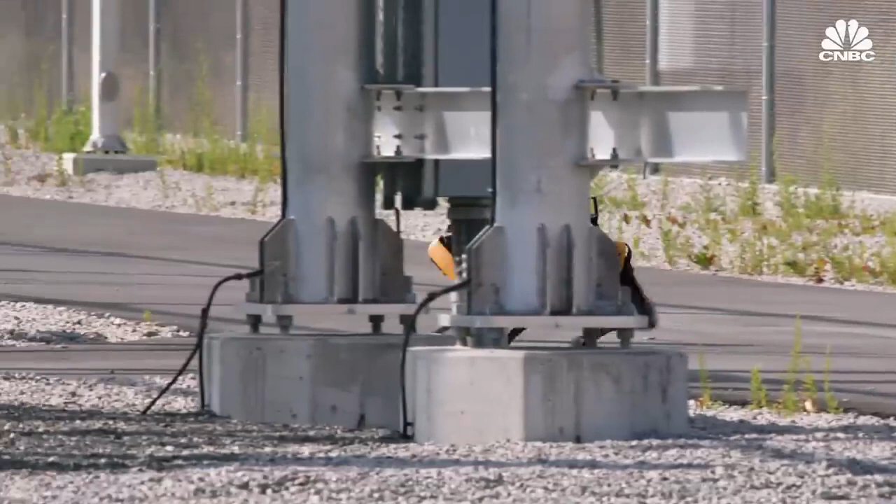I think Hyundai is positioning itself to be the leading robot manufacturer. Hyundai bought us for our mission. They're excited about our mission to launch novel robots that can help industry. Ultimately, I think they see their own mission evolving beyond cars to generalize mobility, and see the things we've been developing as ultimately complementing them.

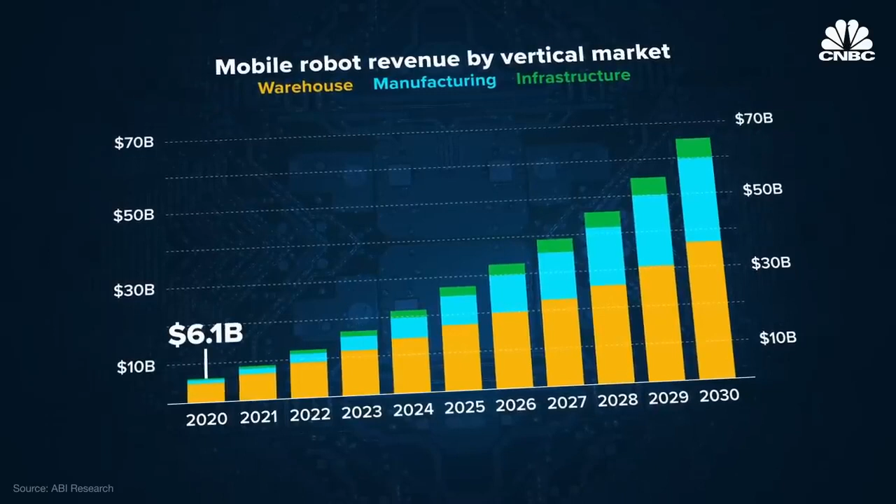Hyundai and Boston Dynamics are still far from dominating the robotics market, but it's a market with a lot of potential. Revenue from mobile robots in the warehouse, manufacturing, and infrastructure spaces is expected to increase dramatically, from about $6.1 billion in 2020 to about $64.9 billion by 2030.

Something like 800 million containers are shipped around the world each year. Many of those are full of boxes. There's probably billions of boxes that are loaded and unloaded by hand each year in the United States. It's a huge job, a mountain of material that has to get moved. Stretch is really power tools to help people move that material.

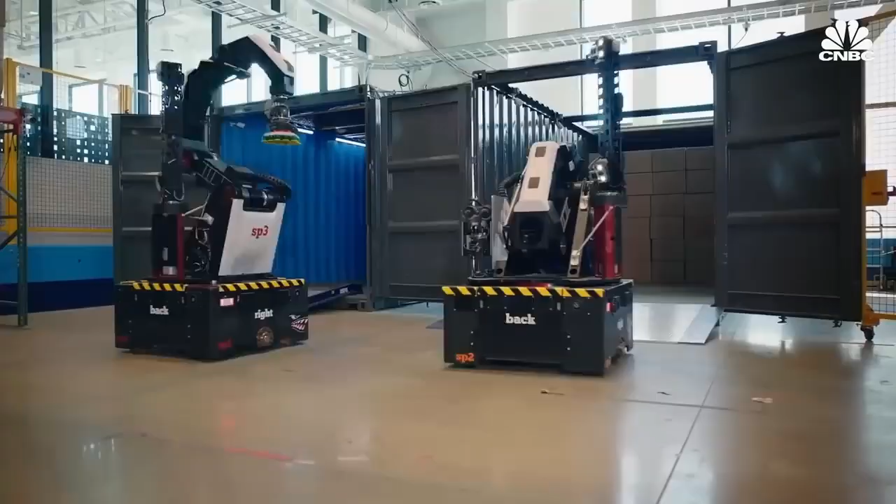Stretch is made up of a few different parts. The robot uses a mobile base to move around tight spaces and go up loading ramps. An arm, gripper, vision cameras, and sensors allow the robot to identify and handle a variety of different objects.

We're starting with truck unloading, but we think truck loading, as well as what we call order building, will follow. So when you go through a warehouse and assemble a bunch of different boxes onto a pallet, that order building is a big job, and we're actually developing that at present.

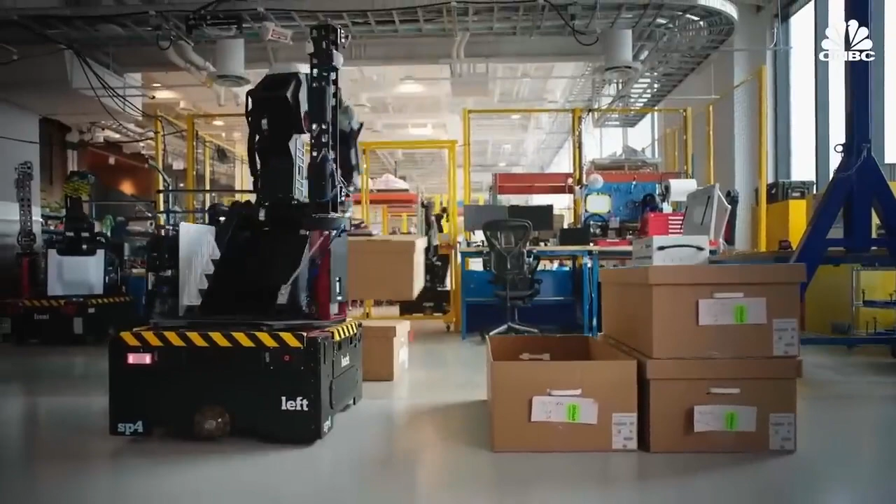Similarly with Stretch, we're building in intelligence so that the robot can deal with unexpected conditions. If suddenly it knocks down a cascade of boxes, the robot can deal with that, pick them up, and clean up its own mess.

How do you feel about competitors? There's Amazon that has their own robotics for warehouses. There's a lot of automation companies entering the logistics space, and of course the logistics space has a huge variety of problems to solve. We're uniquely focused on mobile box moving, which almost nobody else is looking at. So we think we have a nice, safe entry into that market that we can own for a significant portion of time.

Amazon, I think, is lighting terror in the hearts of all the warehouse owners across the world. So they have a very motivated buyer that wants to buy tech that's comparable to what Amazon is developing.

Boston Dynamics says it expects Stretch to go on sale next year, though it would not provide a price point. Customers can also opt to purchase just the computer vision software that powers Stretch, which Boston Dynamics calls Pick. The company says it's working with a few early adopters to test the robot, but would not say who those partners are.

Unlike Stretch, Spot has already hit the market. We've sold several hundred Spots thus far. We launched it really commercially just last year.

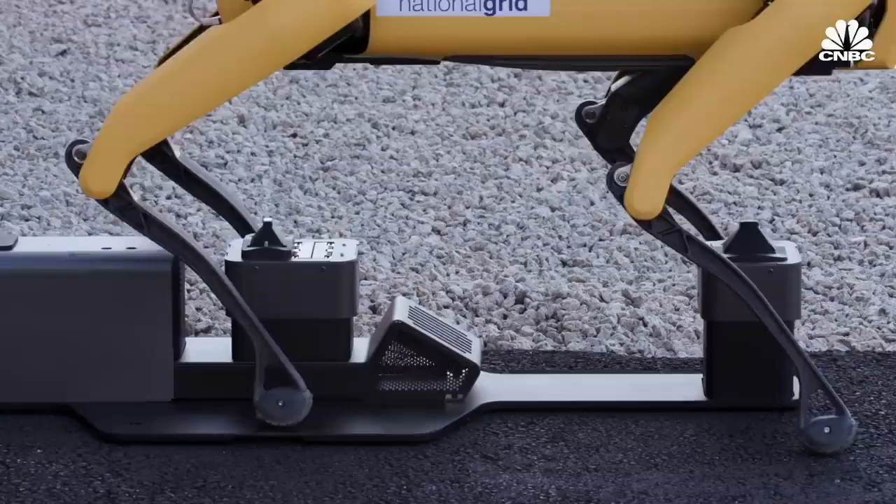The entry-level Spot Explorer is about $75,000. We have another version that has additional capability and a recharging station that's a little bit more than that. Sales have exceeded expectations, really. Payloads like pan-tilt cameras and LiDAR are sold separately and can be quite pricey.

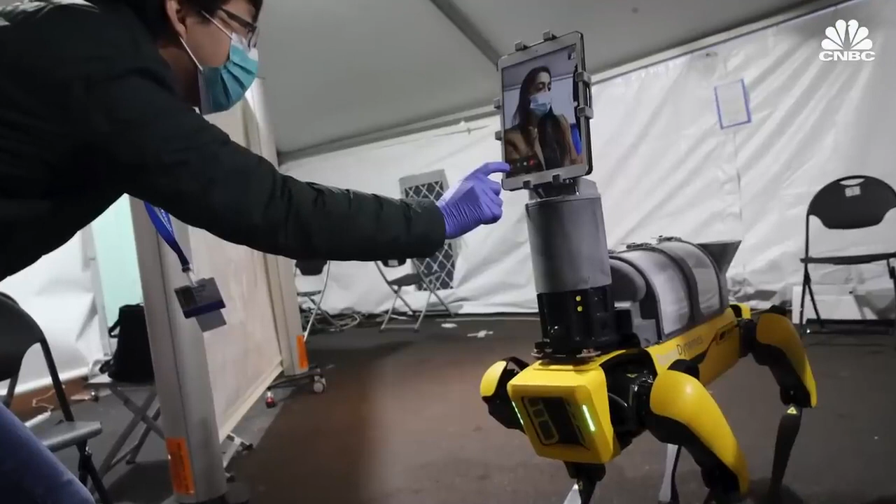Even so, Spot has received interest from a number of industries. So far, the robot has been used to do inspections at construction sites, oil rigs, nuclear plants, to check the vital signs of COVID-19 patients in hospitals, and even remind people to maintain social distance amid the pandemic.

So I would take a substation like this and subdivide it into maybe 4 sections, and I would have the robot do a detailed inspection on each of those 4 sections.

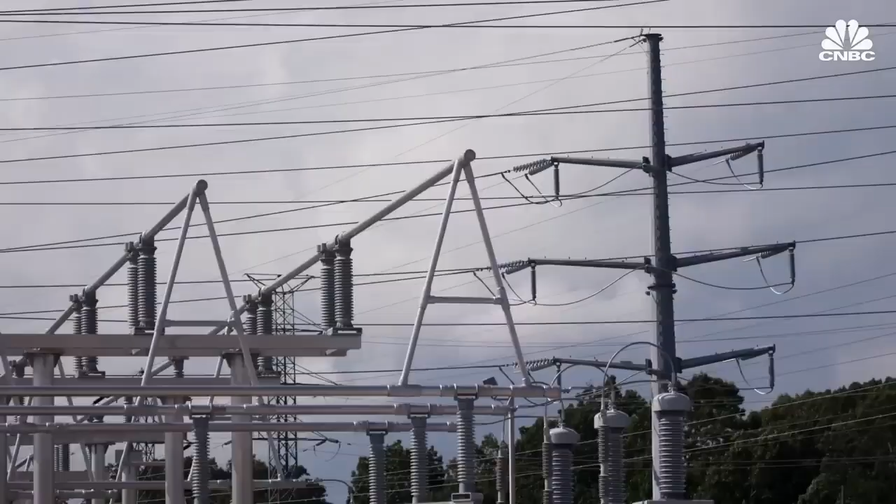This is Dean Berlin. He is the lead technology analyst for National Grid, an electric and gas utility company that serves customers in Massachusetts, New York, and Rhode Island. For the past year and a half, Berlin and his team have been testing 2 Spot robots by programming them to do inspections of National Grid's equipment. Berlin says the team also considered other robots for the job, but chose Spot for its mobility capabilities.

Some of the advantages we find for the Boston Dynamics robot is that because it's a 4-legged walking terrestrial robot, it can actually traverse our substations fairly easily. The robot also can be equipped with a variety of different payloads, making it mission specific.

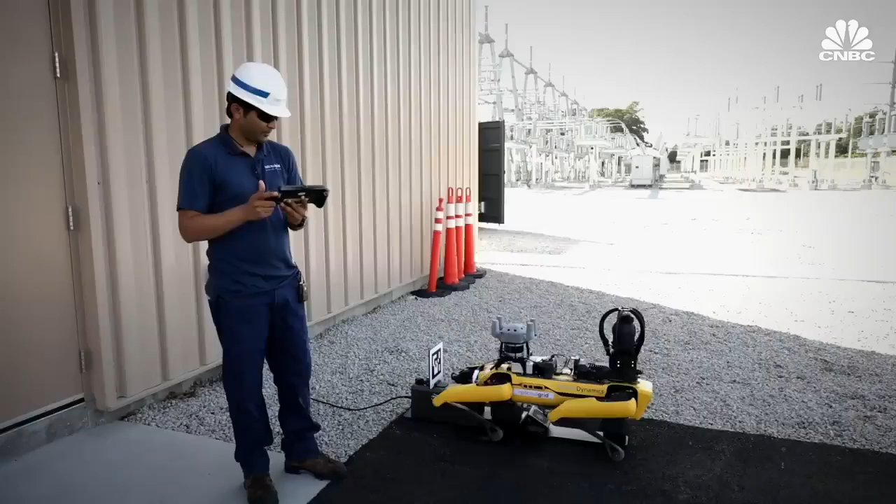So we're going to power on and undock the Enterprise robot. A typical inspection looks something like this. First, engineers program Spot so the robot knows where to go and what gauges to pay attention to. The instructions for each mission are relayed to the robot using a QR code. The robot that National Grid is using is equipped with LiDAR to help it navigate, as well as visual and thermal cameras to take detailed photos and thermal images of the equipment in the substation.

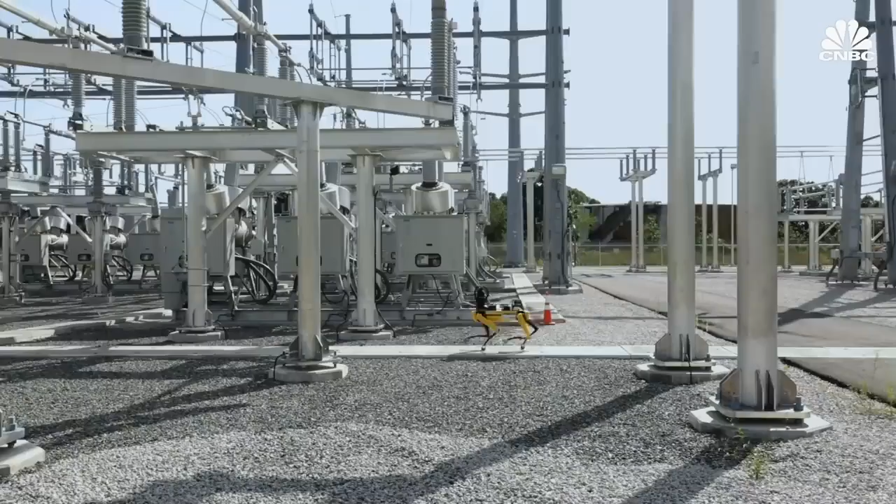The robot will be focusing on switches and circuit breakers. It will also take zoomed-in visual images of some of the gauges on the equipment to monitor their levels. It can use this information to diagnose if there are hot spots on our assets that might indicate areas of concern or areas we might need to attend to in upcoming maintenance.

Prior to using Spot, most inspections at National Grid's substations were done by people. In some cases, operation of the substation would have been temporarily shut down, since it wouldn't have been safe for humans to do the inspections while the equipment was still on.

National Grid has noticed savings in terms of time because the robot is able to perform these missions in parallel to a human performing other tasks. So in a sense, you get efficiency from having a human and the robot operating at the same time.

Spot may even go to space. NASA has been sending teams of the robotic dogs into caves to see if they can one day be used to search for life on other planets. Caves' protection from cosmic rays and stable temperatures, NASA says, makes them the most likely of places to find life.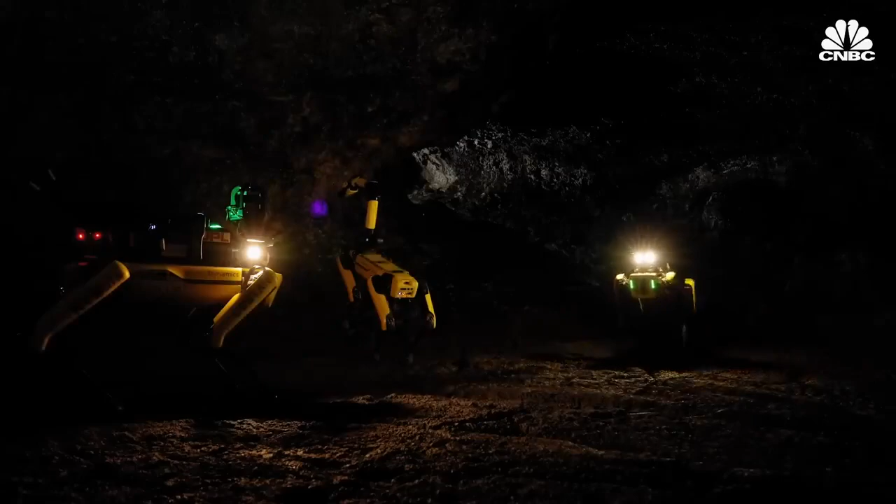My team's focus at NASA is on developing next-generation AI and autonomy algorithms for robotic systems. Our solution, which we call Nebula, analyzes the terrain, the environment, and risk. In a certain sense, you can look at Nebula as a robot brain that we integrate with a robot body that could be a wheeled rover, a legged platform, or even a flying drone.

In the case of exploring caves, Agha says his team chose Spot for several reasons. You often come across narrow constrictions, narrow passages that you really want to be able to traverse with a system that is not large and bulky. The Boston Dynamics robot offers an interesting combination of small size, at the same time high locomotion capabilities and enough power to traverse those sorts of narrow passages.

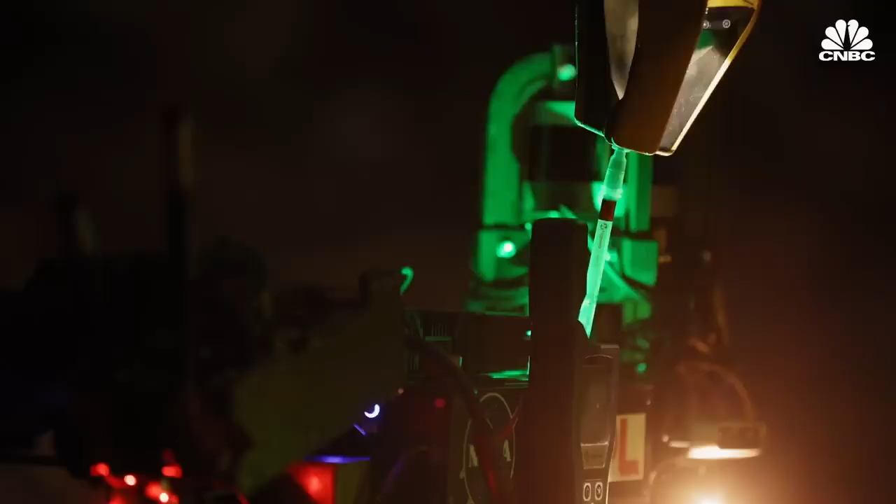The ability for Spot to be equipped with different payloads also comes in handy. Sending in one large robot to carry all the scientific equipment needed for a mission would make navigation in the cave difficult. Instead, NASA sends in teams of Spot robots, which can each simultaneously accomplish different tasks.

NASA says there are a number of things that need to be worked out before Spot can explore new planets, but the potential opportunities have scientists excited. We have a region on Mars called the Tharsis region. There are a lot of interesting caves that, if we can explore one day, we will learn a tremendous amount of knowledge and get a lot of science from it, but it's highly uneven terrain. That's where different and new locomotion ideas need to come in, and legged platforms is one of those that can transform how we think about exploring.

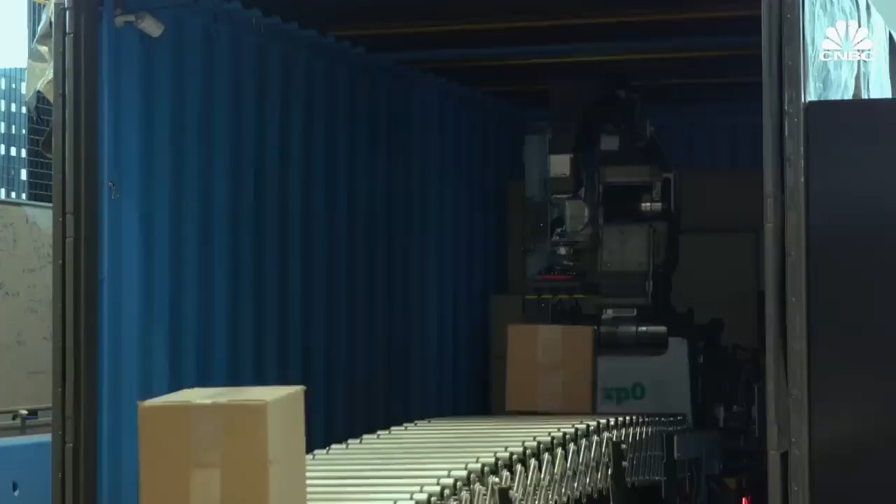Although demand for warehouse and inspection robots is expected to increase in the future, Boston Dynamics still faces a number of challenges on its road to commercialization, many of which the company has already run into with its Spot robot. Over the past 10 years or so, we've basically solved most of those fundamental research problems. And when things were working well enough, we started to ask, how can we make this practical and how can we start making this useful in real applications?

Manufacturing, having a service department, having a sales team—those have all been new skills for us. Marketing, all new things for us that have encouraged us to really expand our staff. Playter says his team has grown from 100 employees during the R&D stage to 400 employees now.

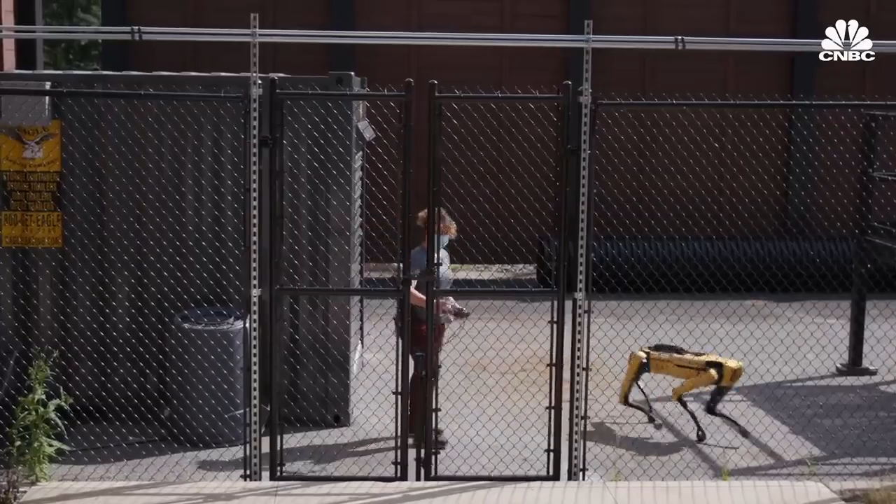So far, Boston Dynamics says it's been able to keep up with demand, producing around 40 to 50 Spot robots a month with the help of contract manufacturers. Final testing, assembly, and repairs are done in-house. But in order to compete in the larger market and have a shot at profitability, experts say Boston Dynamics needs to seriously ramp up production.

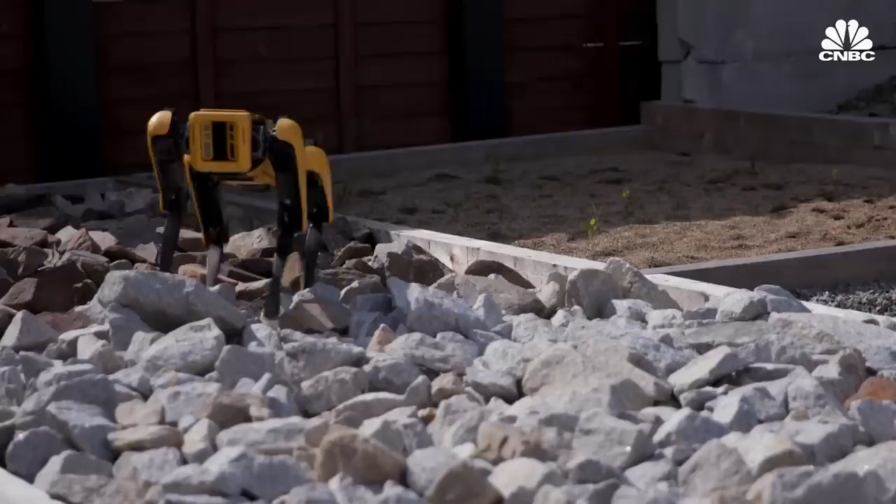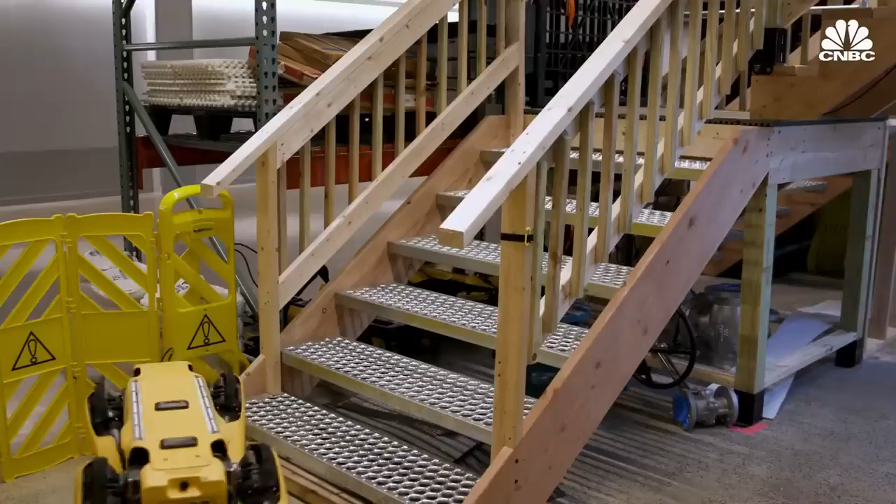Boston Dynamics hopes that's something else Hyundai can help with. Hyundai is really going to be a great partner for this stage of commercialization because they bring expertise in manufacturing and obviously a worldwide footprint in sales and service. And those things are going to help us get our robots out into a broader audience.

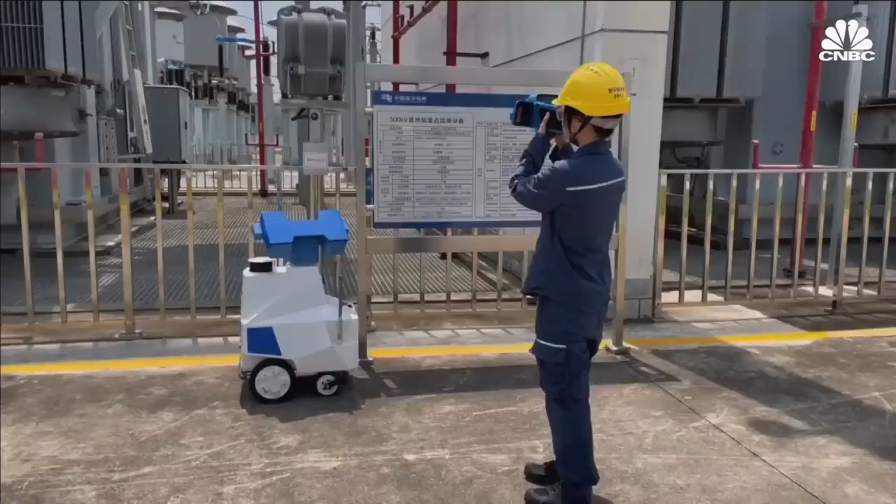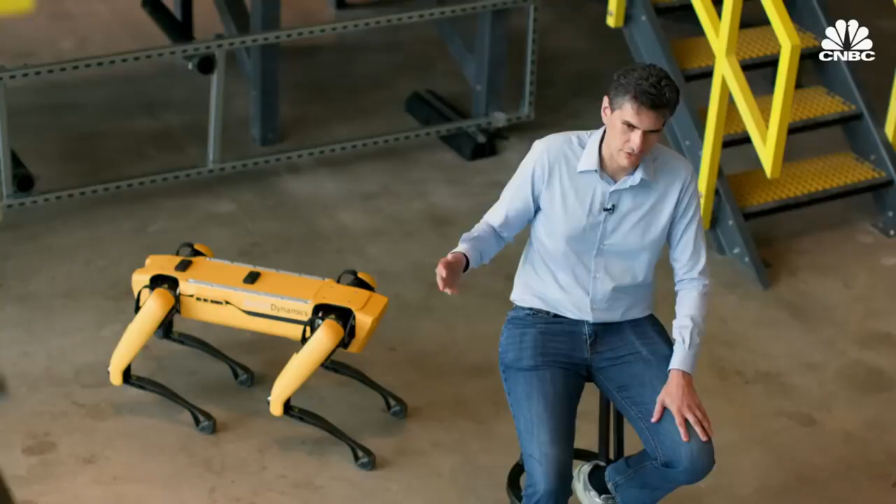In the inspection space, Spot will have to contend with wheeled inspection robots and flying inspection robots or drones. A number of companies, including Swiss-based ANYbotics and China-based Unitree Robotics, for example, are also making four-legged dog-like robots, though the latter seems to be marketed more as a human companion rather than an industry tool. We do enjoy a pretty good lead in terms of the robots having reliable behavior in complex environments. Our robots have dramatically better integration between their vision systems and their balance systems. And we also do a lot of the higher level functions that you don't see our competitors doing, like complex mission planning and actually completing a lot of these end-use applications that produce value. Spot's really the only robot in the world that can deal with the complexity of the terrain that people can.

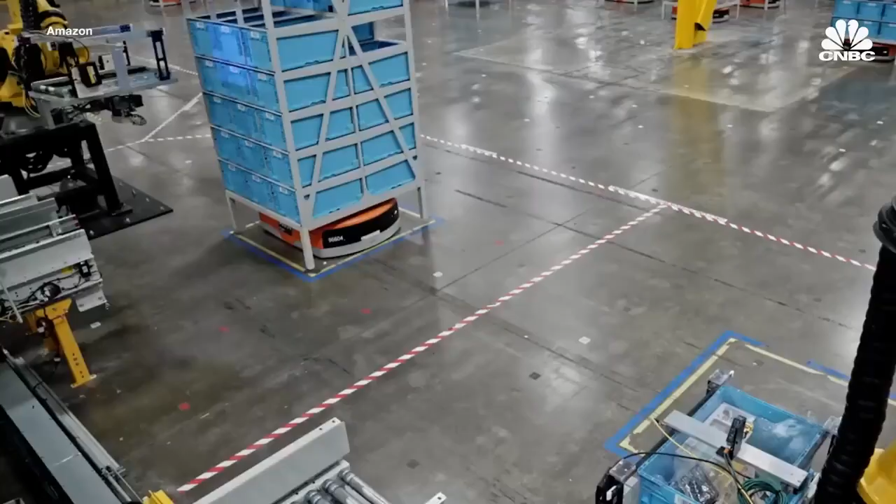Boston Dynamics faces just as much competition in the warehouse robot market, which includes companies like Six River Systems, Fetch Robotics, GreyOrange, and Geek Plus. And then, of course, there's Amazon. The interesting part with Amazon when it comes to logistic business is that they tend to develop solutions just for themselves. Amazon doesn't really supply the technology to external parties. But then again, there definitely can be a competitor because at some point, Amazon may feel like they are ready to now serve the wider market, and then they can now roll out their solution.

In the end, some experts believe the market could be regionally segmented, with Western customers choosing Western robot manufacturers due to security concerns. When you deploy a robotic solution into the field, it's also about collecting data. The current market perception is that if you were to go with the Western suppliers, in this case Boston Dynamics, there is a lot more respect towards how the data is being used.

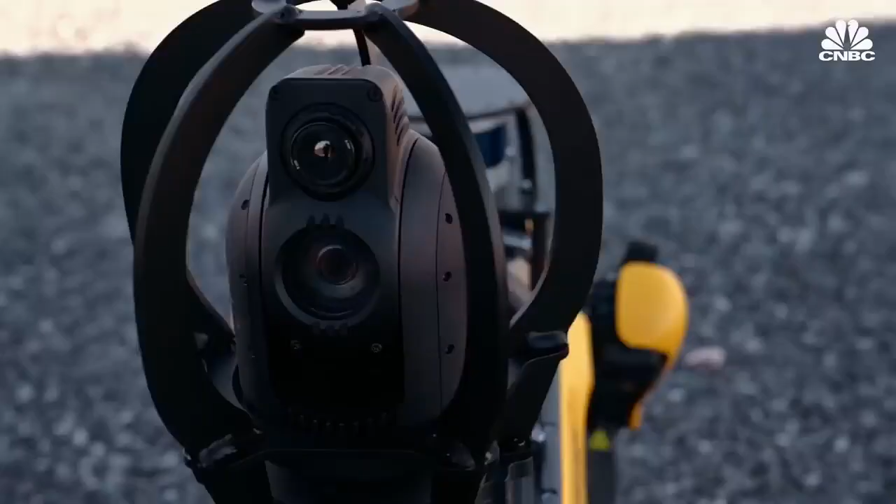Boston Dynamics says it's off to a good start. So I'm sure developing these products is very time consuming and costly. How are you covering the cost right now?

Really through the investment of our owners, such as SoftBank and Hyundai. They're really covering the cost. Now we do have significant revenue at this point, which is also helping. We're generating revenue currently from the sales of our robots, primarily Spot. We have a little bit of time before we're profitable, but we're on a great trajectory so far.

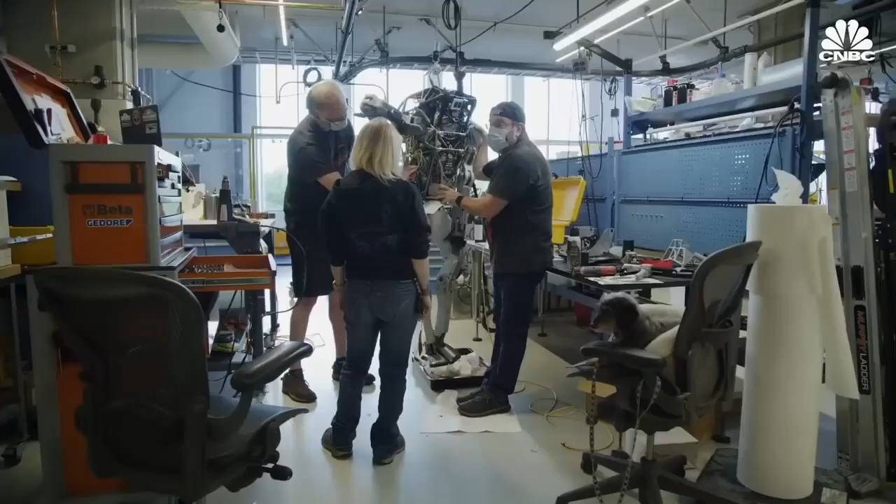As for its R&D roots, Boston Dynamics says it's not leaving those behind. It's critical that we maintain leading-edge R&D work within the company as we commercialize. But we've only covered a fraction of what we need to do with robotics. There's additional work in vision and manipulation that we want next-generation robots to have that we currently can't do. So it's important to keep pushing that forefront. Playter says the company is also looking at other industries, including construction, manufacturing, and entertainment.

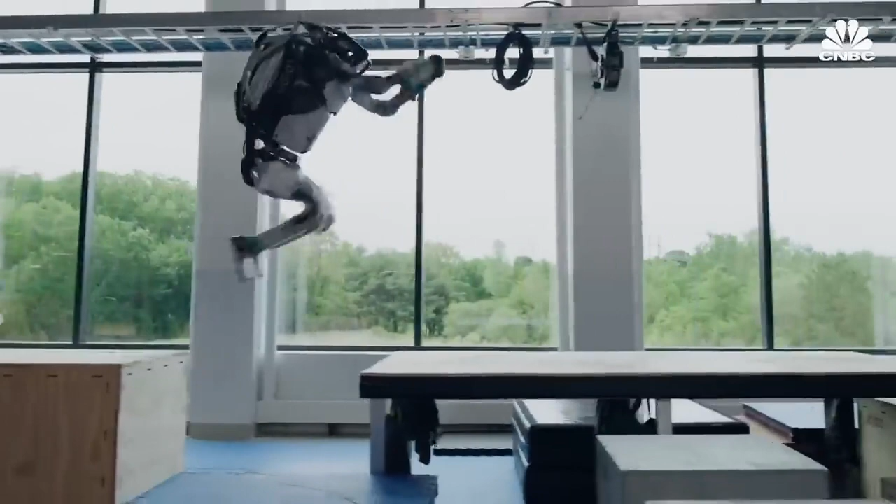As for Atlas, it will likely remain in the lab. Could we see Atlas doing parkour with us in our backyards someday? I do think robots will ultimately have relationships with their owners that could be rewarding and interesting. I don't see Atlas as being that product. I hope in the long run, robots aren't the exception. Instead, they become the rule and that we're all comfortable around them and they delight us and enhance our productivity and safety.